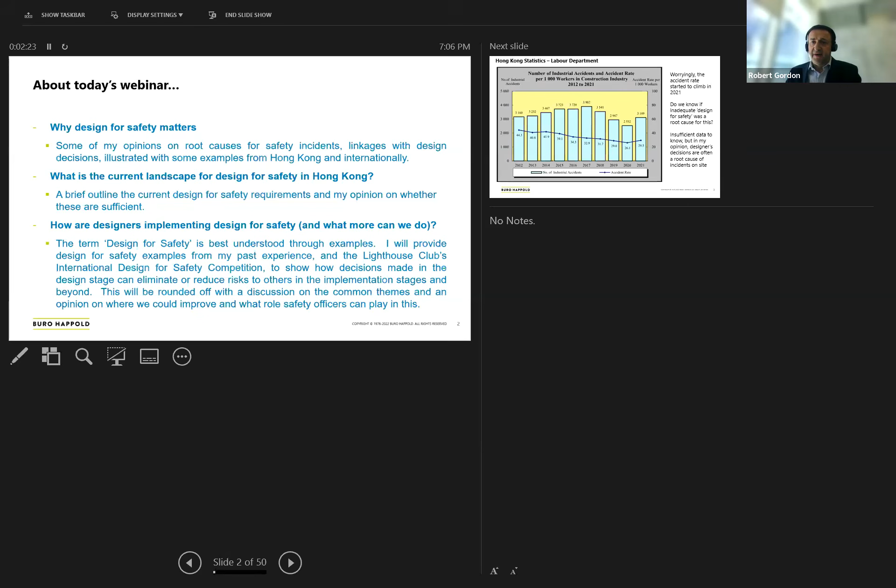I want to cover today why design for safety matters. I'll give you some of my opinions on root causes for safety incidents and the linkages with design decisions. I'm going to go through a little bit of the current landscape of the regulatory or legal requirements for design for safety and how that fits with the Hong Kong landscape. I'm also going to talk about how designers are implementing design for safety, and think about what more we can do.

A good place to start, and I'm sure a lot of you have access to these statistics, is the Labour Department in Hong Kong. What we can see is that the accident rate since 2021 has actually started to climb, having made some improvements over the preceding years. Hard to know if that's statistically relevant, but we do have to ask if design for safety is a root cause in any of these accident rates increasing, or for the current accident rates. There isn't really enough data there, but it's just a personal opinion that design for safety or designers' decisions is often a root cause of the incidents you see on site.

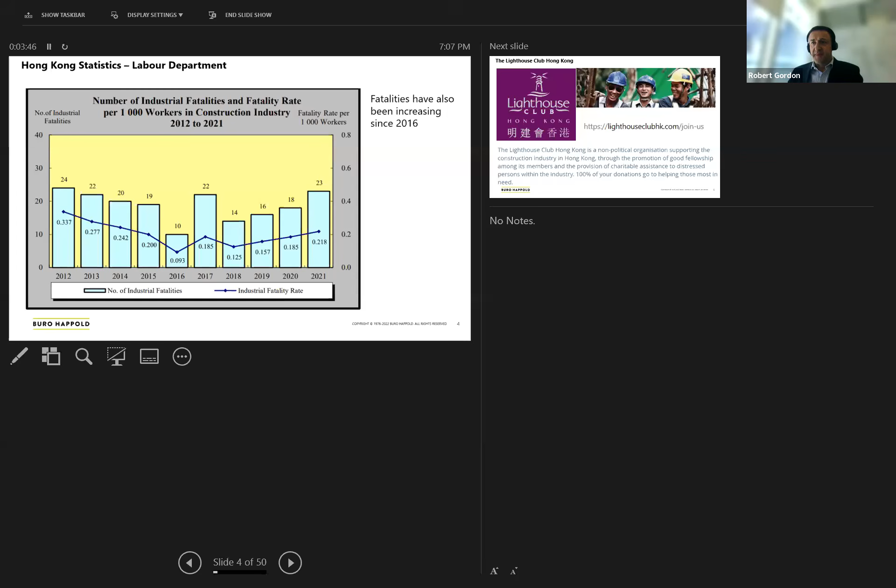Another statistic we can look at is fatalities. Again, in the construction industry, we can see that fatalities, since having made some improvements up to 2016, have started to go the other way. So are we making things worse, or is it such a low number overall that statistically it's going to vary anyway? Let's hope that we can reverse it, because that's what we want to do.

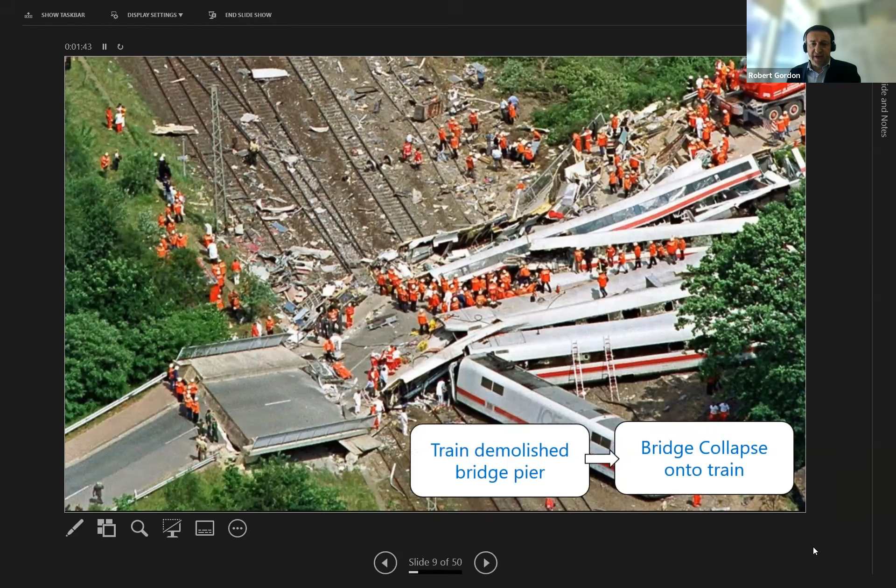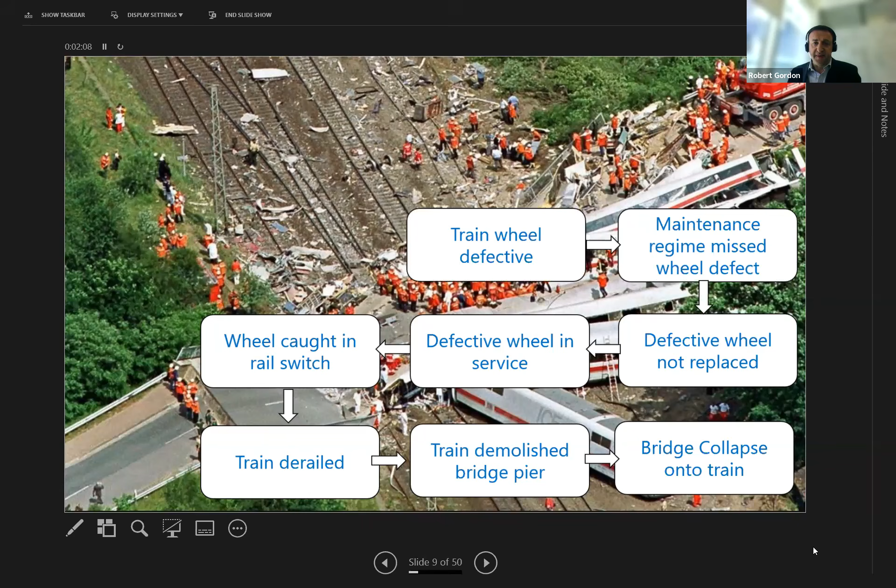So the bridge has collapsed onto a train, it's quite clear to see, but the train has demolished the bridge pier, and the train had derailed prior to that, and the wheel had been caught in a rail switch. It was caught in a rail switch because there was a defective wheel in service, and the defective wheel had not been replaced. The maintenance regime missed the wheel defect. The train wheel was defective already, and you can ask questions about whether the wheel design was adequate.

But I'd like to focus on the highlighted area, which is the fact that the train demolished the bridge pier and collapsed onto the train. The question really is, could we have saved more lives at the design stage if the bridge deck had not fully collapsed? There's an example a few years later from this event, where I was overseeing design of overpass bridges on the Taiwan high-speed railway, and we actually designed and built into the design criteria that if a bridge pier is demolished by a derailed train, the deck will still remain standing. It might crack, it deflects, has to be rebuilt afterwards, but it won't fall down onto the train at the time of the incident. So this is one of the key factors going back to design for safety - had the designers of this bridge thought about it, then perhaps fewer people would have been killed and injured.

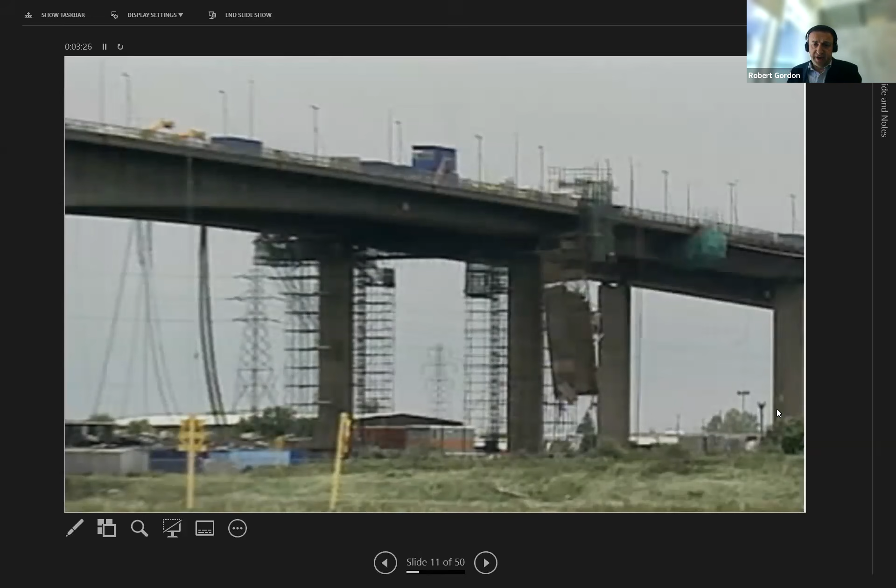There's another incident that happened back in 1999 on Avonmouth Viaduct, and I was actually on this project as a junior assistant resident engineer - 4 people died in this incident. What you can see here is a gantry that's hanging down and looks a bit broken, and actually it's supported. This whole gantry is supported on gantry rails that run on the underside of the cantilever of the bridge deck. And it shouldn't be there, it should be on the other side.

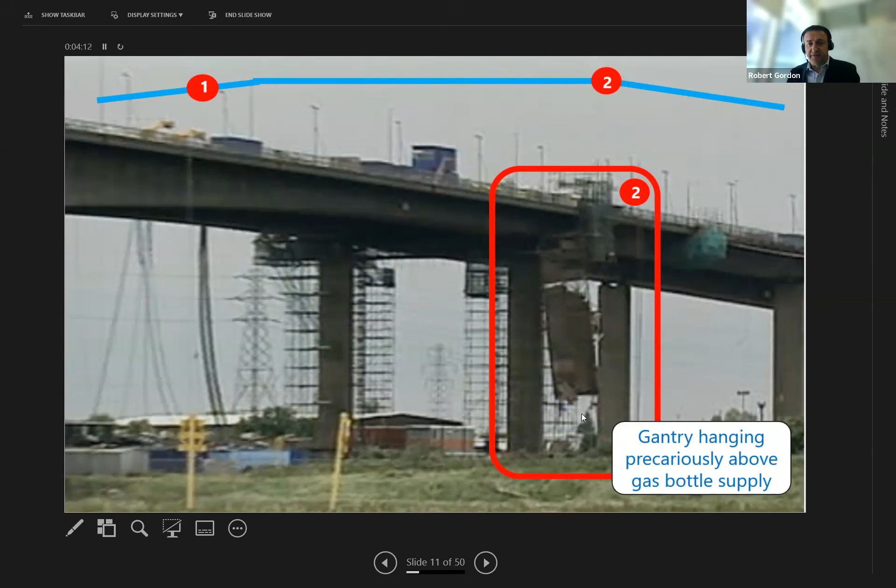I've just put in blue a key plan. So area 2 is the north approach, and area 1 is the south approach, and the flat area is the main span. This gantry should have been near area 1, not area 2, which is more than 1 kilometre away. What's happened is this gantry is hanging above a gas bottle supply, which could cause other issues if it fell down.

There's a vertical Alimak scaffold carrying the lift from ground level to the deck level for the bridge strengthening works, which has been shunted over by a metre from the impact. That gantry had acted like a sail - basically it had fallen down into this vertical position, acted like a sail, picking up the wind and going along the rail before it hit the gantry here, before it hit the Alimak here. What's happened earlier at area number 1, further along the deck, is that the lower end of this gantry fell off the end of the rail, tipping 4 people out, 20 meters to the ground.

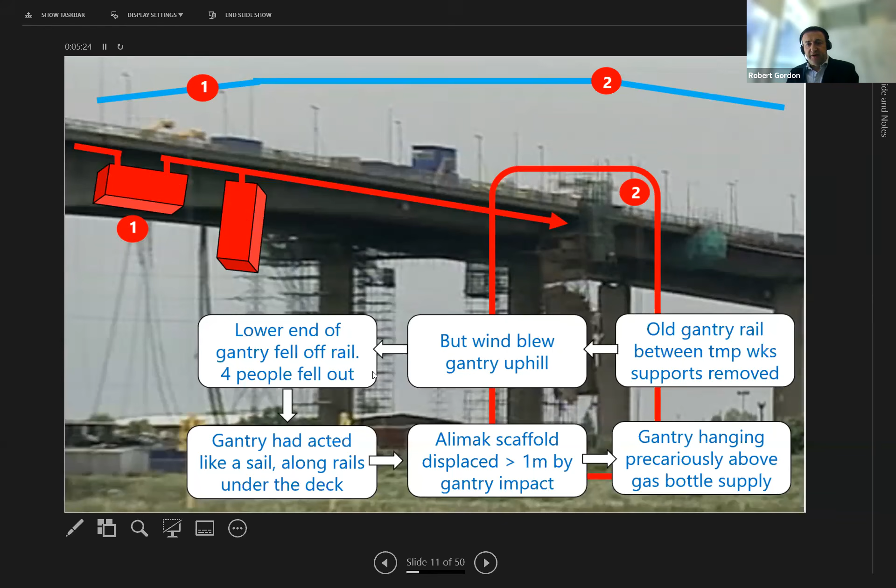You would think that with the slope of the approach span, securing it from falling downhill would be the issue, but actually it blew uphill. What was happening was there was rail works going on to replace the gantry rail. So what would happen is people would come in and they would take out a section of rail above and then put in a new section of rail to replace. So that old gantry rail between the temporary work supports was removed.

And although it was secured from going downhill, it wasn't secured from going uphill. Now, when that gantry was moving into position, it was moving into position with a new gantry crew for the day. So it's possible that they missed one of the steps in securing the gantry from going uphill.

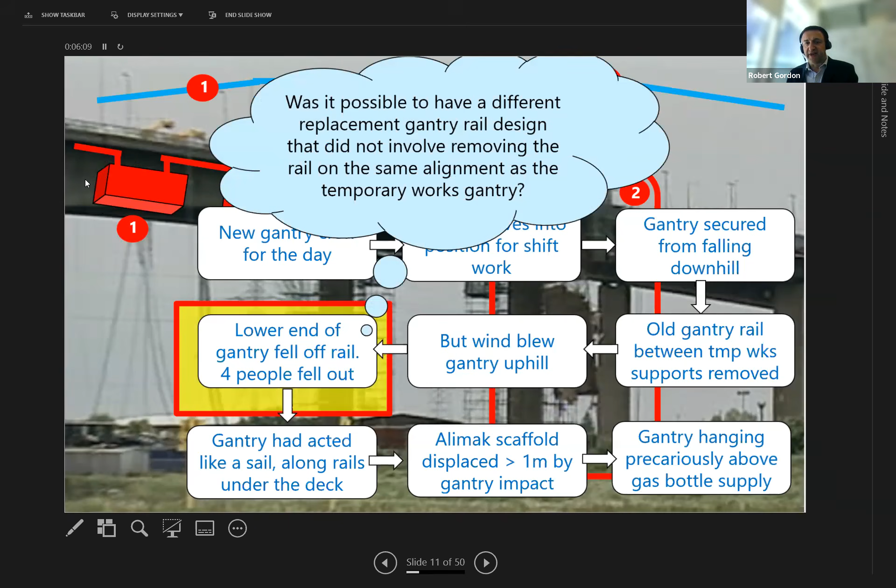But whilst this has gone through the courts and it's a well-documented case, one of the thoughts going through my mind is the fact that 4 people fell out. Was it possible to have a different replacement gantry rail design? Could the temporary works design have been on a different alignment to the permanent works, or vice versa? And therefore the risk would have been eliminated at the design stage.

This is a store in Riga. 50 people died here, and this is the aftermath. You can see that the roof has collapsed. It was in the news at the time, and the newspaper article was, 'The weight of the soil for the garden, made heavier by recent rain, will be closely examined.'

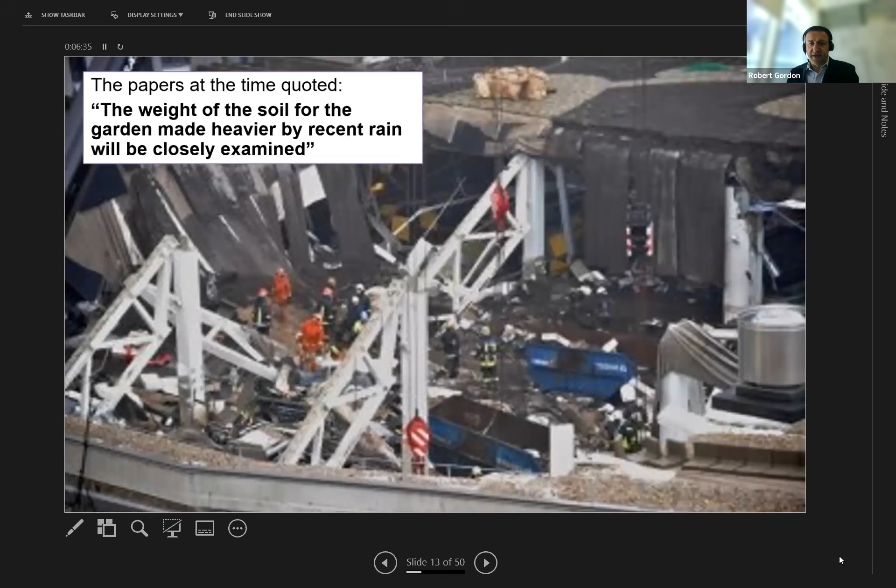So the question is, did the designers consider the saturated weight of soil for the green roof after it's been raining? How about the deflection of the roof under additional superimposed dead load than perhaps it was designed for? And what was the effect on deflection of the roof structure on the drainage paths under load, and the potential for retained water depth adding to the load incrementally?

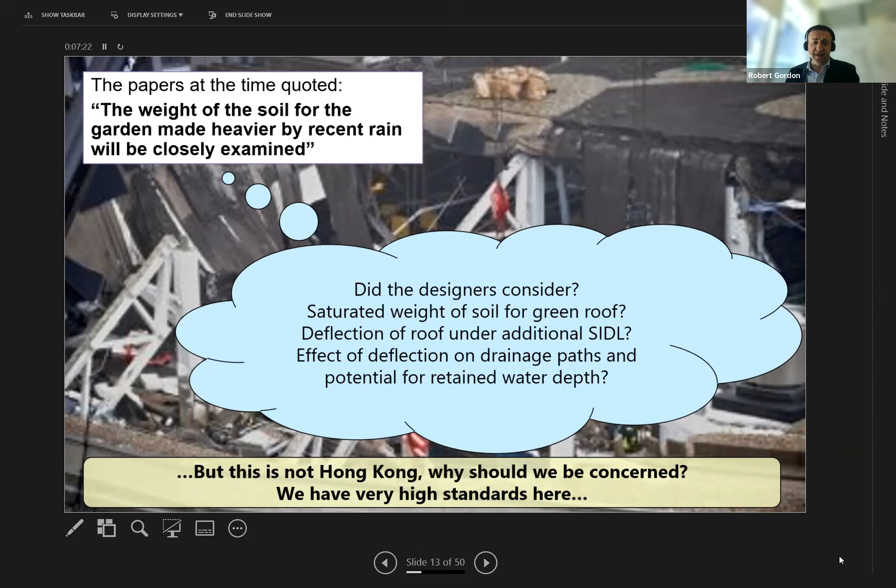I haven't seen the report for this collapse, but undoubtedly there was a linkage here. And the question comes up, well, this is Riga, it's not Hong Kong. Should we be concerned? We have very high standards in Hong Kong. And it's true that we do have high standards in Hong Kong, but then we had this.

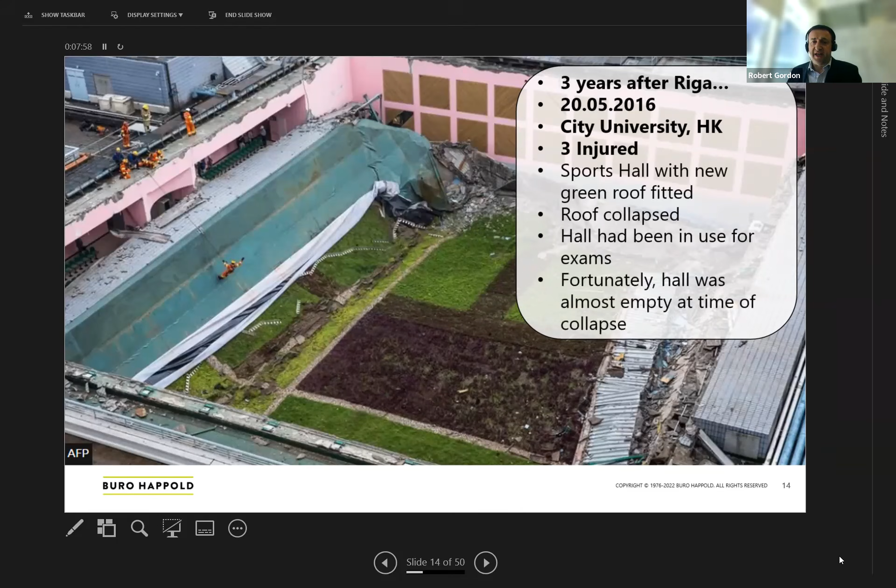And you may recognize this. It's basically 3 years after Riga, time enough for people around the world to learn lessons. 2016, City University, Hong Kong. 3 people were injured, and it was a sports hall fitted with a new green roof, which had collapsed on a hall that had been used for exams. So you can imagine that had that hall been full of people at the time of the collapse, the casualties would have been much higher.

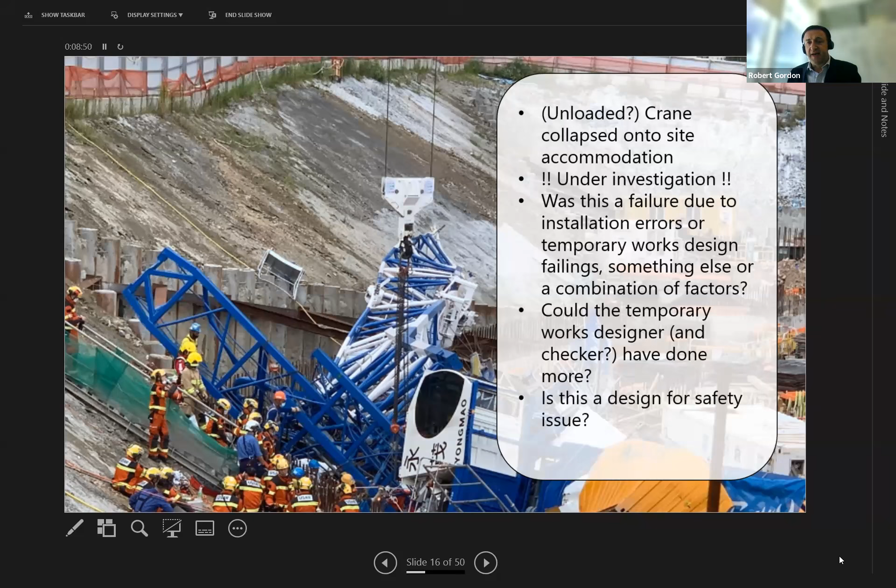There might be a report out by now, but I believe it's under investigation. But I think we have to ask ourselves, was this a failure due to installation error or temporary works design failings, or a combination of factors? And could the temporary works designer and the checker have done more? Was there enough redundancy built into the design? Was it easy to build? Was it easy to build without too many defects in the construction? And so the question is, is it a design for safety issue as a root cause?

Those are some examples of why design for safety matters. And I thought I'd also touch on the current landscape for design for safety in Hong Kong.

For those from the UK on the call, people will be very familiar with the CDM regulations, which was enabled by the Health and Safety at Work Act 1974, first issued in '96 and has been revised since. It sets out what people involved in construction work need to do to protect themselves from harm and anyone the work affects. Whatever your role in construction, CDM aims to improve health and safety in the industry by helping you plan the work, have the right people, cooperate and coordinate, and have the right information and manage the risks. Communicate it all so that everyone who needs to know knows, and consult and engage with workers about the risks and how they're being managed.

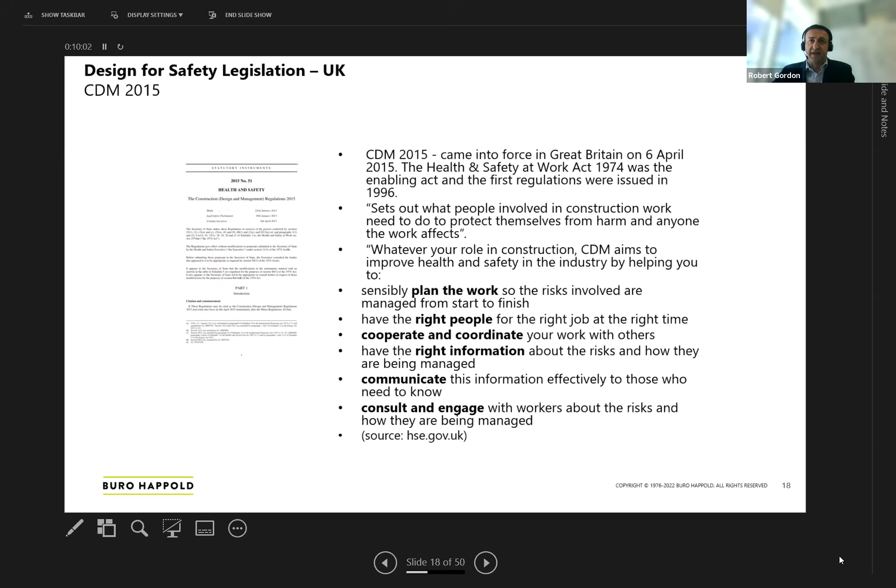So it really is a full life cycle appreciation of the health and safety risks, starting from design.

We can also look at similar legislation that's been enacted in Singapore for design for safety regulations in 2016. If we look through here, we can actually see very similar requirements: the duties on developers and designers, a review process needed through every phase of the construction project, a register for all projects, and the appointment of a design for safety professional, mandatory on all projects of significant value.

So there are some good examples of where legislation is used to help enforce design for safety. To the best of my knowledge currently, in Hong Kong, we have guidance notes developed through the works bureaus, but this is only guidance, it's not actually legislation. It does follow similar principles: identify and minimize hazards which may give rise to risks, reduce risks due to design and inform the parties, cooperation with project supervisor and other designers, provide the information.

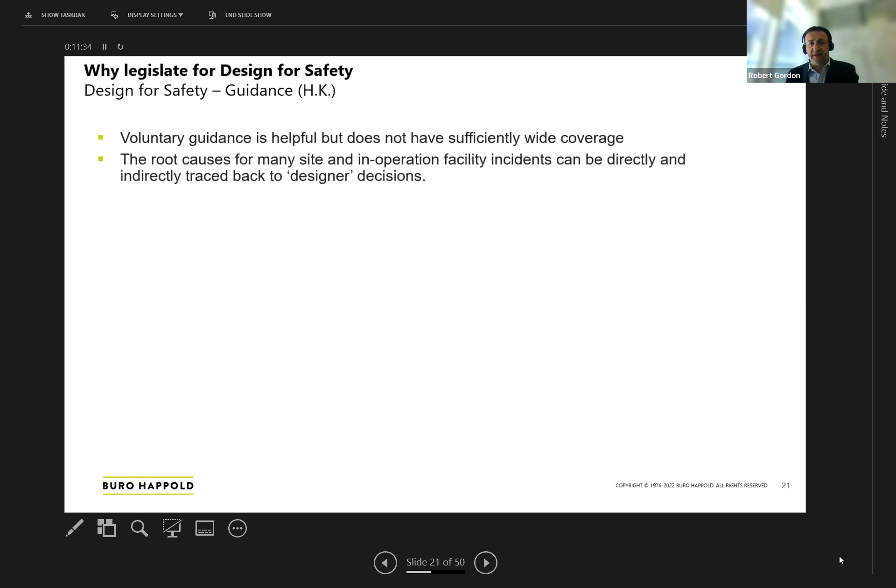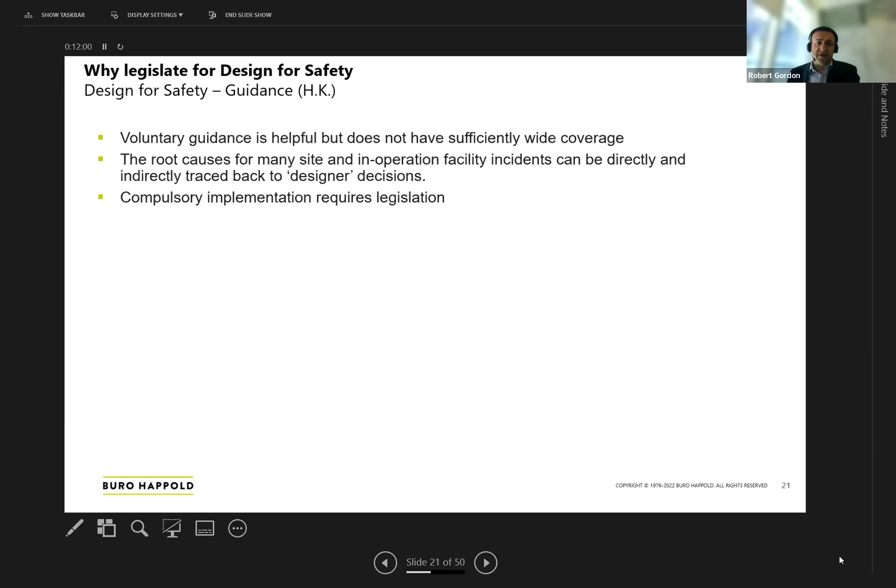What I think is probably missing is that this really is just voluntary guidance, and it does not have sufficiently wide coverage. If you look at the root cause for many site and in-operation facility incidents, they can be directly and indirectly traced back to designer decisions. So if we want compulsory implementation of CDM or something equivalent, it does require legislation to get everybody on board. Otherwise, it's purely voluntary with organizations, public or private, that wish to do so. And only in Hong Kong, only the government has the power to implement that legislation.

But construction industry bodies can lobby the government. And I would say that people like ourselves, everyone on this call, particularly those in Hong Kong, can approach our respective institutions and bodies who represent us and ask them to lobby the government.

But we also have to recognize the flip side of this. There are certainly interested parties that may take on extra liability, and they don't want it. And of course, nobody ever does want the liability. But it is the responsible thing to do.

I think that people who particularly own assets and drive the requirements for assets should have an involvement. And really, the effort for this is because we want to save lives. We want to save people from horrible accidents that cause horrendous disabilities, time off work, and distress to our families.

It also seems that we only get action taken when a major accident occurs. It's headline grabbing, it's on the front page of the news. Somebody gets put in a good political light for taking action, and also scapegoats are sought. Someone always has to take the fall, someone is to blame. But it's a very reactive approach.

And if we have legislation and the training and all the support that goes with it, it becomes proactive. And I would challenge ourselves to say, can we change the paradigm on when we take action?

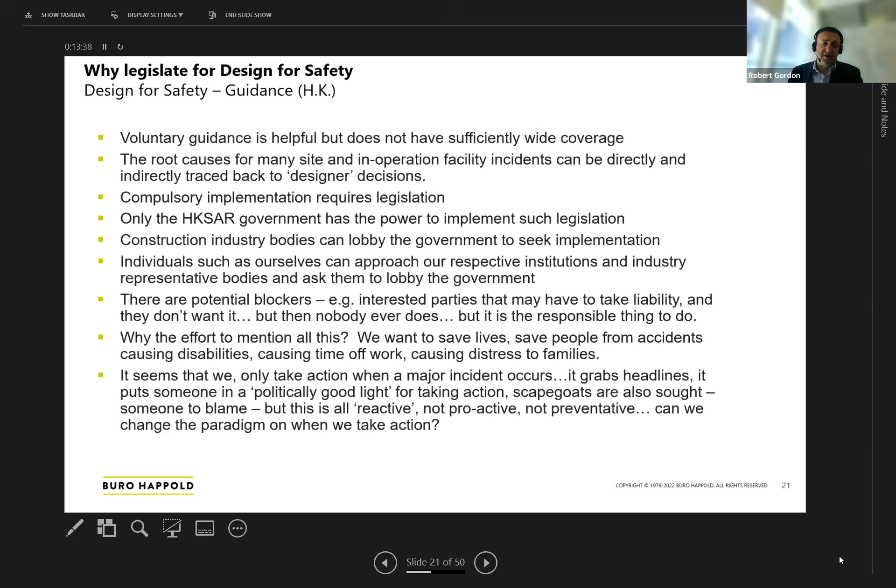So design for safety is about aiming to prevent before we implement. There's no ordinance in Hong Kong to cover it. And I think that if we had a Hong Kong version of, for example, the UK or Singapore version of their regulations, it would help to improve our health and safety in Hong Kong, with more motivation via accountability.

So there are bound to be people on this call that agree or disagree with that, but I think it's worth putting it out there.

Now, on a more positive note, we can look at how designers are implementing design for safety and what more can we do. But we probably need to think about who are designers.

It's easy to think of consulting engineers, but really I think it's anyone or any organization that prepares or modifies designs, BIM models and drawings, specifications, bills of quantity, design calculations, because this affects anything that can be built on a site.

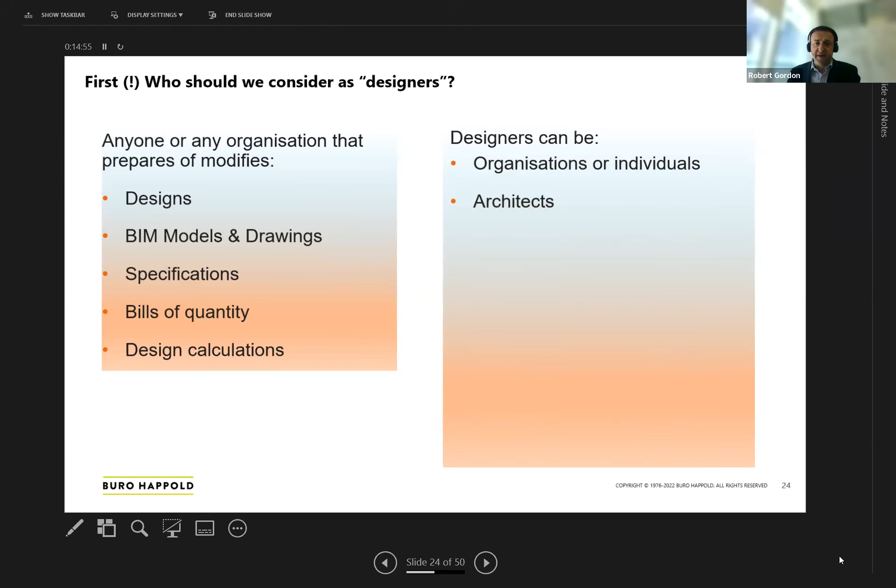And as a result, designers can be organizations or individual people: architects, interior designers, consulting engineers like myself, QSs, anyone who specifies and alters designs, contractors, subcontractors, tradespeople if they carry out any form of design work, and you may think of a few others as well.

Now I'm going to share some examples. These are a mixture of my personal experience, also of entries from the Lighthouse Club International Design for Safety competition. I'd like to emphasize the purpose for sharing it: it's really that I'd like to share some good examples. We might look at them and feel that there are improvements that could be made. I think we always appreciate there's always room for improvement. So I wouldn't say they're all perfect examples, but I think that at least they do get across the spirit of incorporating design for safety.

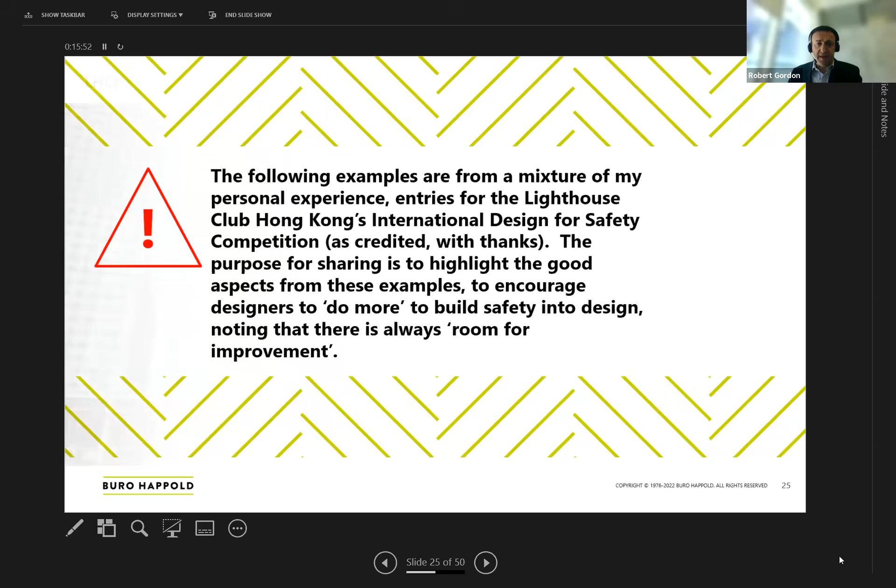So this was an entry from Aurecon, David Law, Swanston Square, The Malthouse in Melbourne, Australia. It's a historical building that was dilapidated, had been abandoned for 25 years, a former brewery building, and was going to be part of a new office development. What I liked about this one was that there was a full consideration of the properties of the materials of the building, given it was a historic property. They'd also given a lot of consideration to how the structure was working, how the load paths were working.

That's very important if you're trying to understand the influence of your new design on the existing structure. We do have examples of existing buildings in Hong Kong that have been modified and they've actually collapsed during construction.

In this particular example, they did a very good job of it. It was reviewed for construction, demolition, strengthening works, temporary stability and construction loads. And they'd also sought to minimize the steelwork connections, in particular above some tanks that were being left in place, which also reduces the future maintenance access need in difficult to reach areas.

In the design drawings, they'd also highlighted all the residual risks, and they'd built some flexibility into the design to cater for on-site conditions not matching those known at design, because with an existing structure you're often uncovering elements that people have not been able to inspect or properly understand before the contract works are awarded.

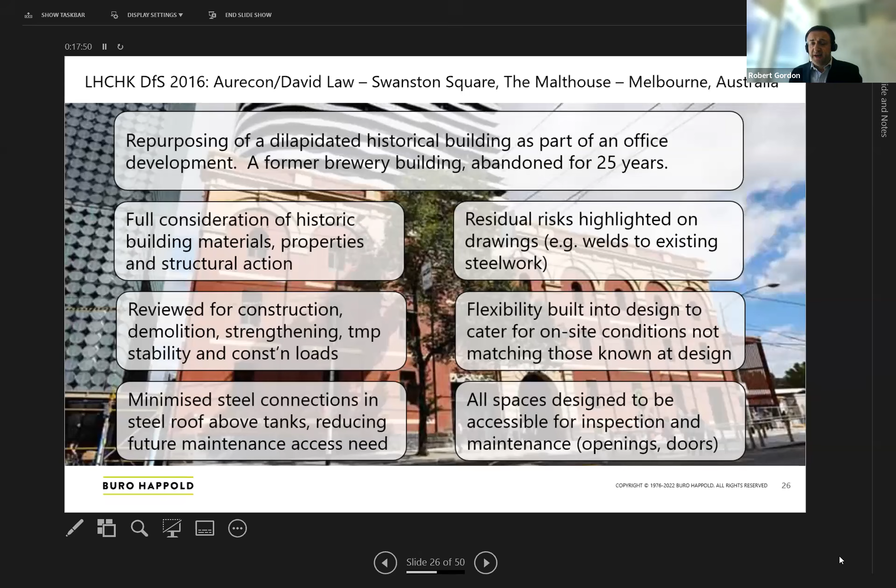Now, bringing it home towards Hong Kong, this was a good entry from Arup and Simon Pickard on the M+ Museum, West Kowloon Cultural District. They had to put a new museum building above existing railway lines, which were in tunnels, and also on reclaimed land. So quite a tricky site.

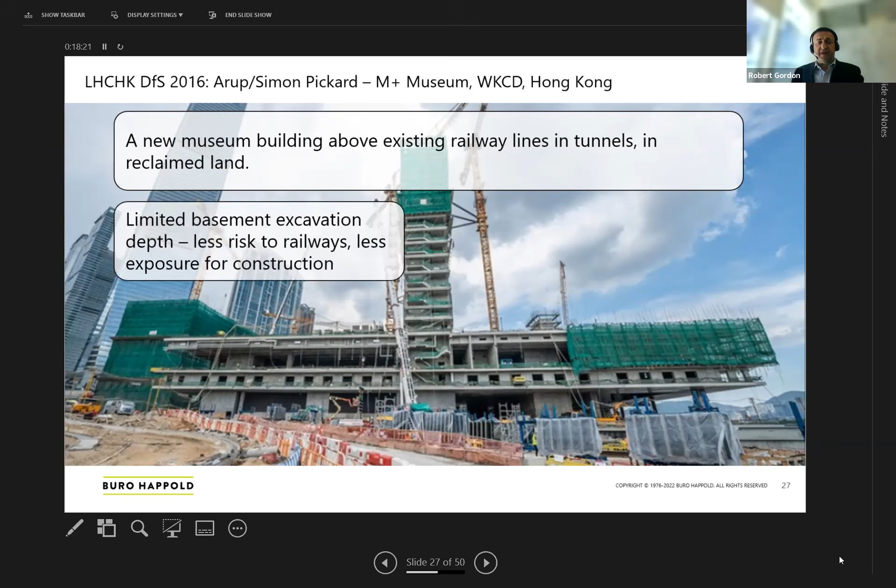And the facility is, as I'm sure all the Hong Kong people here on the call will know, is fully open now. But what they did was they limited the depth of the basement excavation. The more depth, the more risk. And that also meant by reducing it, there was less exposure for the construction later.

They also built in high-level access walkways for maintenance for the MEP plant and lighting. So basically, one of my favorite questions to anybody on design for safety is, how do you change the light bulb when it's 5 meters up in the air? And if the answer is you need to get some special kit out and you need PPE, you've failed the first exam question on safe access to change a light bulb.

In this case, from the high-level access walkways, you can safely access the light bulb and you don't need any special kit to change the light bulbs.

Now, they took it very seriously. They had design for safety gateway reviews at 30%, 70% and 100% of the design stages, across all the disciplines. And they also enabled an advanced works contract to look at the buried utility locations and diversions needed, which also helped to remove some of the in-ground risks.

And they also provided construction sequence diagrams. I always think that any designer must always come up with at least one plausible method of construction, and I think they should also show it on the design information to show contractors: yes, I've thought about how I'm going to build my asset, and I've come up with a feasible method. I understand the plant and the temporary loads and the construction loads to build it, and I've allowed for it.

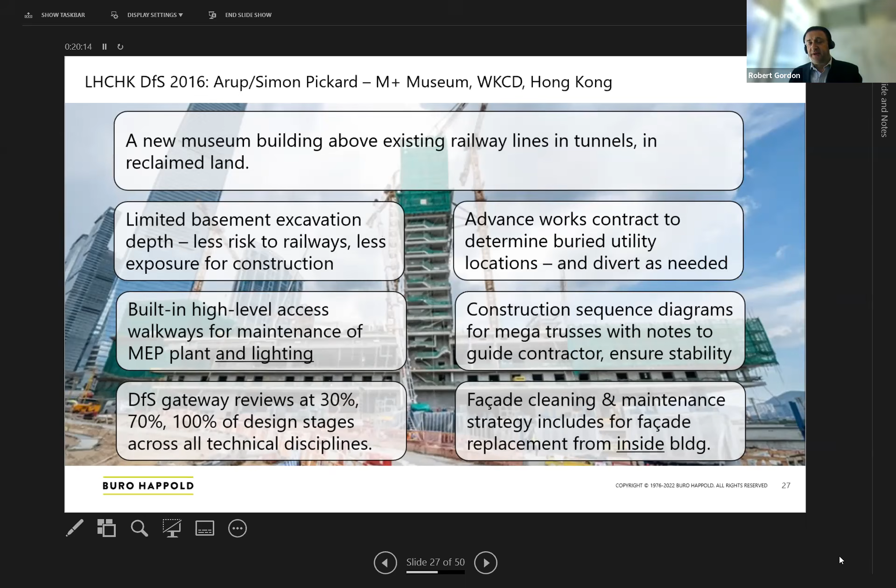Now, here's another example. This is the Liantang Heung Yuen Wai border crossing point road and tunnels. And there were some challenges with this one because there were 48 8-meter diameter cross passages for a 4.8 kilometer dual 2-lane tunnel. Tunneling through volcanic rock, high water table, variable ground conditions. And at the time, there was no topside access for further ground investigations or pre-excavation grouting. So this had high risk written all over it.

What they did was they looked at having horizontal pre-excavation grouting from the first tunnel bore to increase the extent of the grouting. Also eliminating and reducing MEP equipment in cross passages by design to reduce the diameter. So if you can reduce the tunnel diameter of the cross passages, you've also reduced the risk.

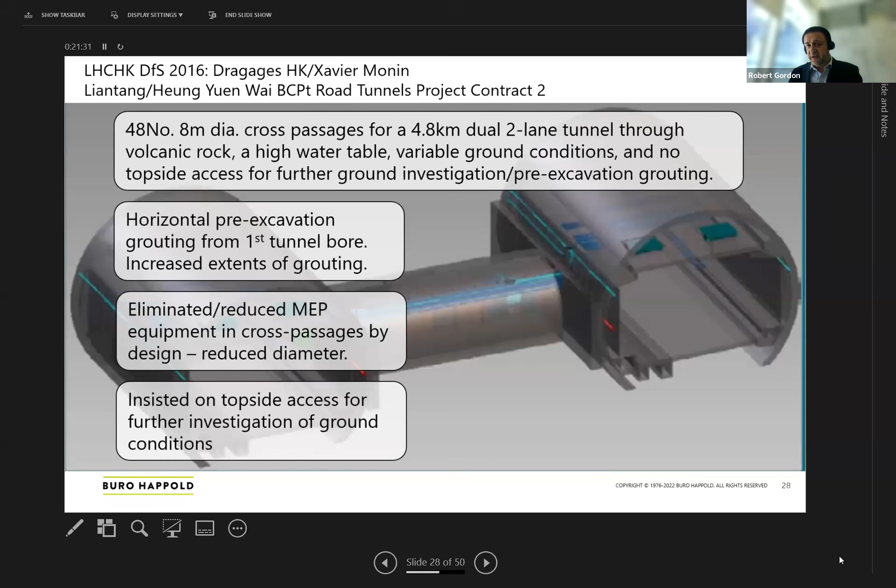And ultimately, they did insist on topside access to get that further ground investigation to understand the ground conditions. And I think if ever you're tasked with a project where they're not giving you access for the ground investigation to properly understand the risks, I think you do have to insist on it. And this is a good example of that insistence paying off.

They used experienced designers experienced in soft, poor ground conditions. This comes back to not just the fact they had tunneling engineers, but they had people experienced in these particularly challenging ground conditions. So it's very important as competent engineers to understand the limits of your competence and know when you need to bring in expertise to assist you.

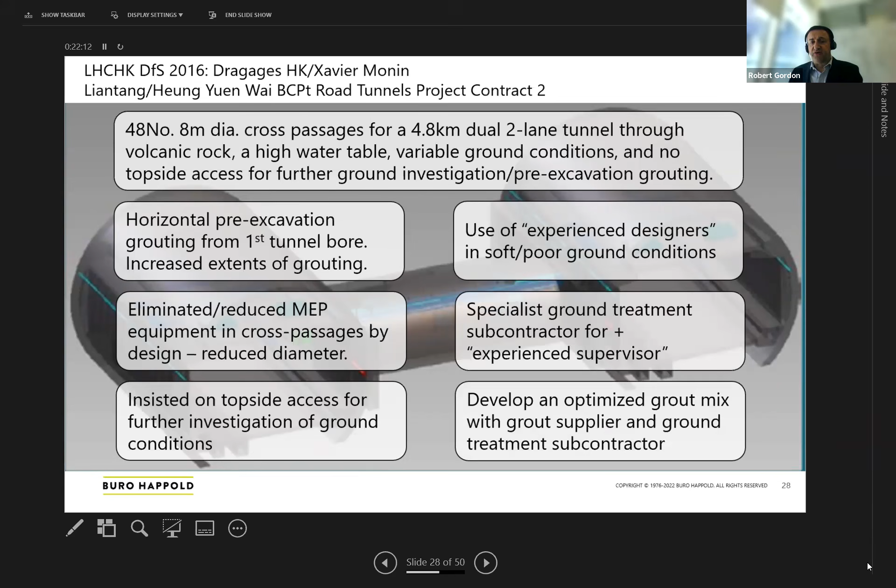They also built in a specialist ground treatment subcontractor as an experienced supervisor, and developed a special and optimized grout mix with a grout supplier and ground treatment subcontractor. So they weren't leaving anything to chance here.

Another example is out at the Tuen Mun Chek Lap Kok Link Viaduct project in Hong Kong. What you're looking at here is a precast concrete pile cap shell. It's a marine pile cap using match cast concrete shell modules. It was quite an interesting challenge here to build the pile caps above the water.

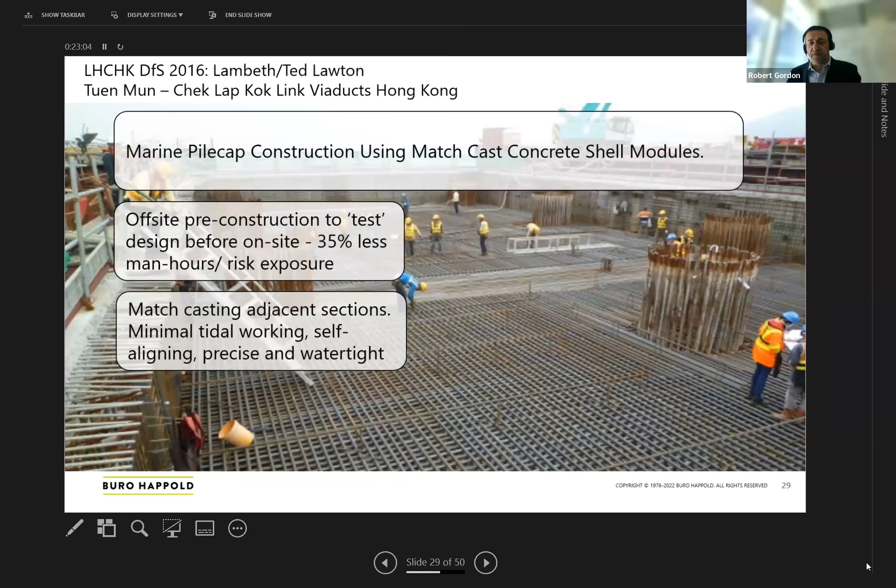So what they did was off-site pre-construction to test the design before being on site. They reduced the number of man hours, which also reduced the risk exposure. Match casting the adjacent sections also minimized the tidal working, and because of that, they had self-aligning sections, which were more precise and watertight from the word go.

The use of these precast and pre-stressed shells mitigated the need for welding. Each shell, which is supported on piles, forms a watertight, safe working area for the pile cap construction.

The bottom level of the caps were also lifted to be above the low tide for around 2 hours a day, which also gave certain construction access. The shells also provide additional corrosion protection.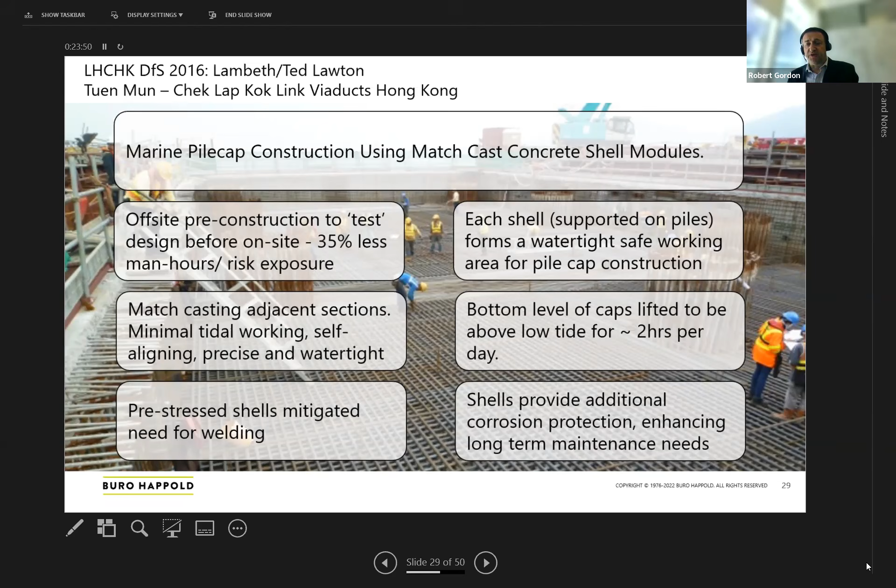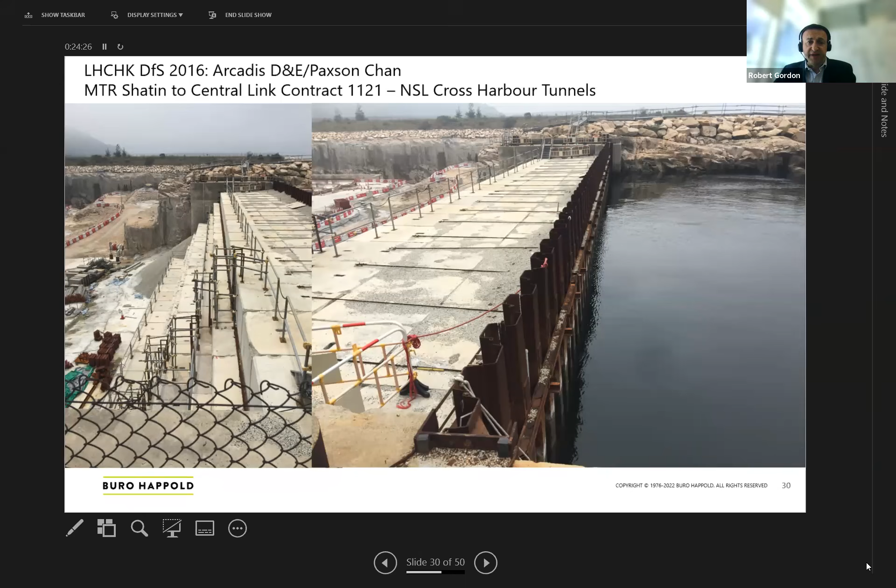Another example here is on the Shatin to Central Link 1121, a contract I was working on, and this is the casting basin at the old quarry at Sheko. This temporary dock gate was actually built out of precast concrete blocks that came from another MTR job, but basically it was needed to safeguard the dry dock area.

All these concrete blocks came with lifting eyes, so with those lifting eyes, it's very easy to lift them into position, drop them in position, very easy to construct, and also very easy to deconstruct later when it's time to let the water back in.

In this dry dock, the immersed tube tunnel units would be constructed, and when it was time to float them out, they'd deconstruct the dock gate, let the water in slowly, and they'd be able to then float the units out for the construction of the tunnel. Indeed, as you'll know, in Hong Kong, the tunnel's now open for service.

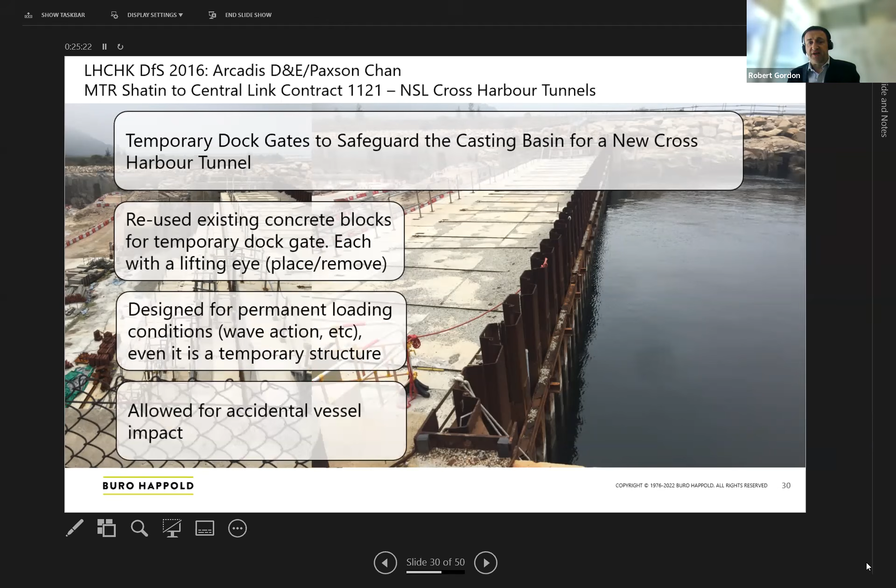This dock gate was also designed for permanent loading, even though it's a temporary structure. It was designed for the wave action, and it was also designed for accidental vehicular or sea vessel impact.

There were grout pipes behind the sheet pile wall acting as a secondary measure in case there was water ingress, so it gave you an opportunity to tighten things up. There was also gravel fill and drain pipes beneath the base of those dock gates to release the water pressure. So again, lots of belt and braces measures to keep people safe.

During construction, fast setting adhesive anchors were specified on the existing abutment walls to minimize diver works in the water. So quite a few measures implemented to safeguard the dry dock area. And there's a picture of the dry dock basin as it was under construction.

Moving to Singapore, an entry from EFT Craft, Siebrandus Wichers, the Singapore Sports Hub cladding installation. I've shown this picture because I think it gives you an appreciation of just how high that roof is. The exposure of trying to do work at height here is enormous. The original requirement was to install that roof and soffit cladding in situ.

But instead, EFT Craft looked at prefabbing those units at ground level using large ground level jigs. That reduced the number of labourers needing to work at height by more than 75%, which I think is fantastic in reducing the risk.

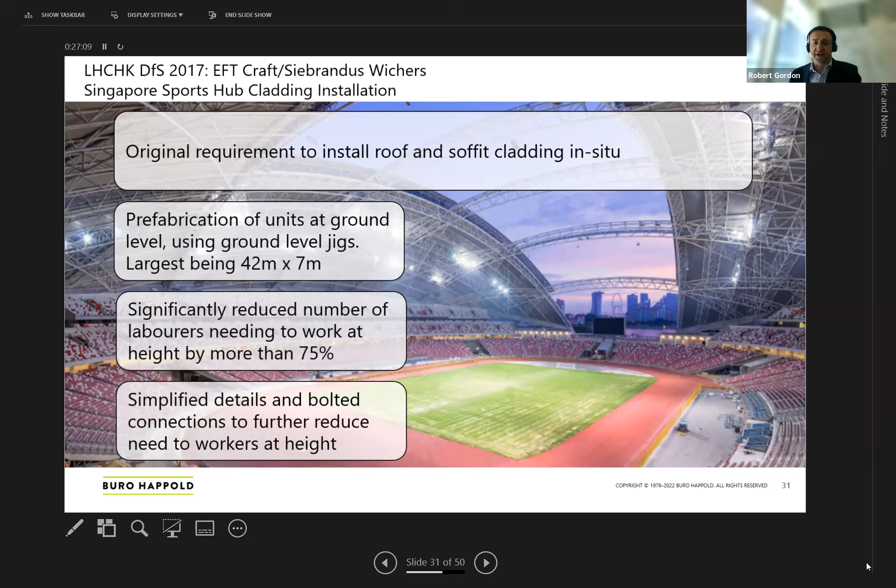They also simplified the details and the bolted connections to further reduce the need for workers at height. One thing about simplification is that the simpler a design is to actually build, the more likely it will get built the way you intended and without any incidents, because there's less opportunity for people to make mistakes or get confused or to not follow the instructions.

So there were no welded connections, all bolts and screws. That also helps with the quality of the work.

They also did 3D scans of the cleats from ground level, then did a computational analysis of those to understand what alterations were needed at ground level before anything was lifted into place at height. Also, by standardizing the cladding panels, it mitigated handling, coordination, and installation errors.

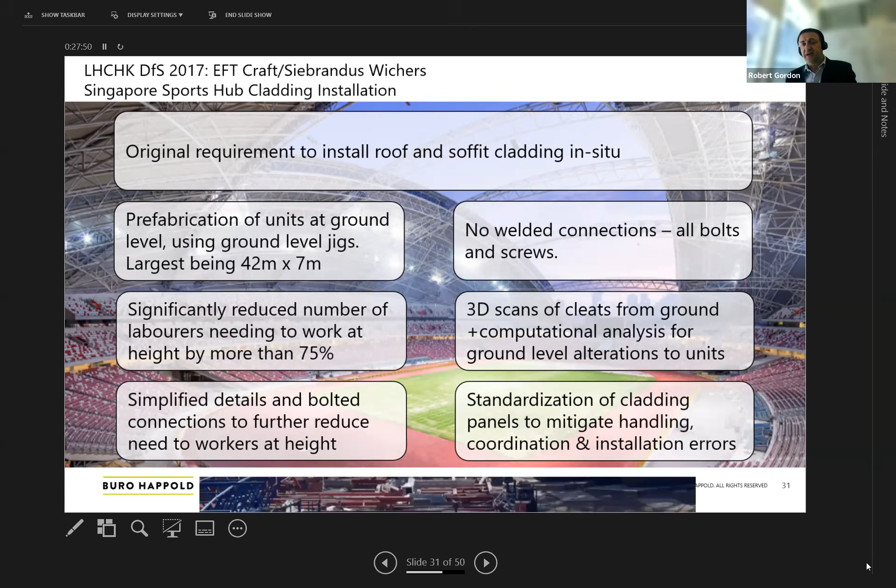So again, quite a few measures here to improve the safety of the built asset for construction by design. And here, again, maybe not a perfect example, but it shows how they're building the cassettes for installation at height.

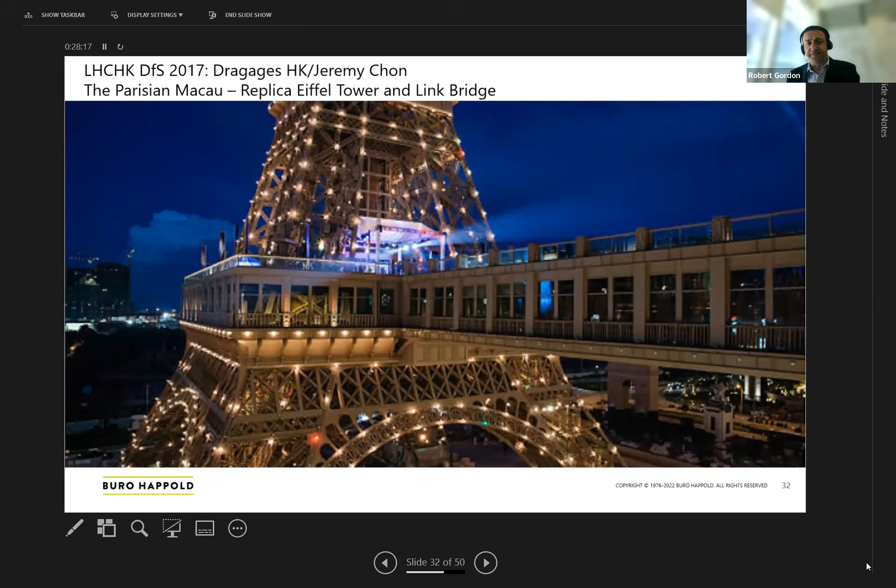Moving over to Macau, the Parisian Macau, this is a replica Eiffel Tower, so this is not the one in Paris. It was the construction of the tower and the link bridge - very complex, slender, high tower.

It was designed for the temporary scaffolding supports to be integrated into the permanent works design. Something designers can do a lot of is consider how they can adapt the permanent works to enable the temporary works and vice versa, so that you can minimize the stages in construction and the amount of works needed.

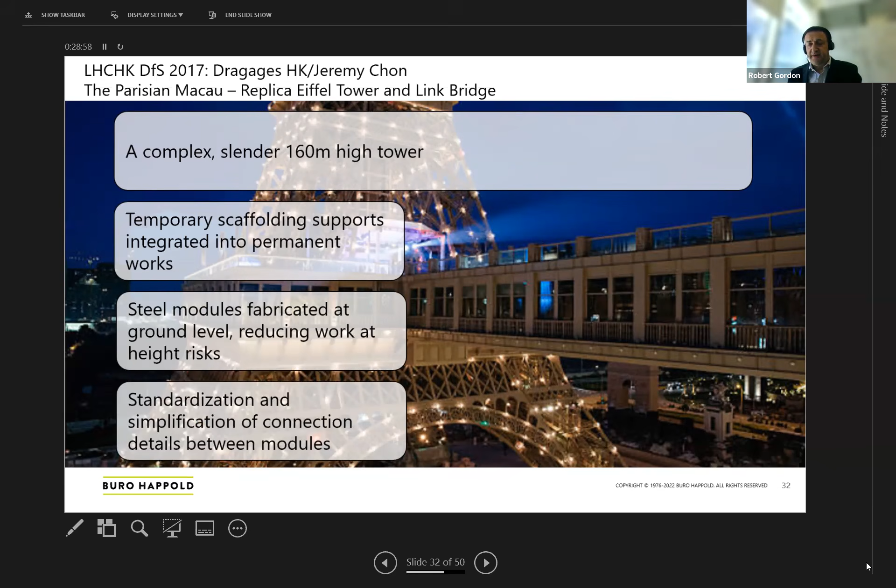In this case, steel modules were fabricated at ground level, also reducing working at height. And there was again a lot of standardization and simplification of the connection details between the modules, again limiting the errors that can be induced by workers and so on.

Now something I want to mention here is important. We're in the digital world these days, and certainly BIM has become more prevalent throughout our industry, and there's a lot of digital tools now there. Digital tools like BIM can be used to build the works before you build the works in the digital environment, effectively a digital twin of what you're about to build. You can check crane capacities, you can check the routing of all your elements, you can check for finger traps, you can really optimize the sequence for safety.

Within the permanent works design, this also included a maintenance walkway incorporated into the link bridge, which means that you have safe access for future maintenance without the need for PPE.

Also on the tower itself, there are a lot of decorative elements, and they were originally going to be cast iron. But why put cast iron decorative elements 30 meters above the height anyone can see them, when you could have glass fiber reinforced polymer elements that look the same, are much lighter in weight, and much easier to lift into position? So you can improve the safety also by being more careful about material selection.

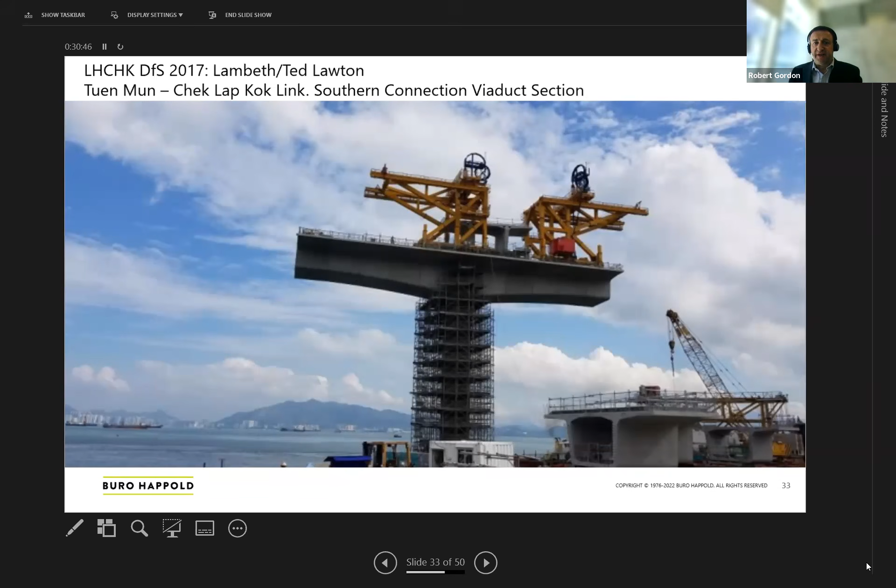Bridge construction has often been a good example of mechanized construction. This one's from Lambeth and Ted Lawton for the Tuen Mun-Chek Lap Kok Link Southern Connection viaduct section - a new mechanized method for bridge construction, and you can kind of see the K-frame design there for these temporary works. Basically looking at factory production methods using very lightweight machines, a kit of parts approach to the machines, standardized modules, good control systems, and a minimal learning curve for any worker having to operate them.

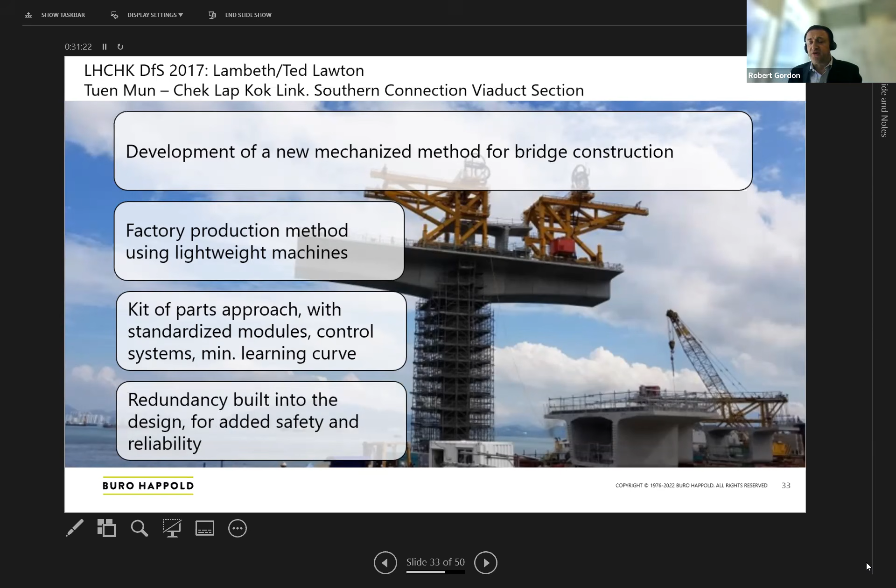Also, redundancy built into the design - I think that's also a key thing, that things do go wrong in construction. Sometimes there are quality issues, but if you build some redundancy in the design, then you're not too close to the bone. And if there is a mistake on site, chances are you can work with it. So it does add additional safety and reliability.

This machine was also single operator run with a handheld remote control unit, hydraulically controlled movement on skidding pads, so it's not wheels - so you don't get runaway situations, particularly when you've got gradients on the highway to deal with.

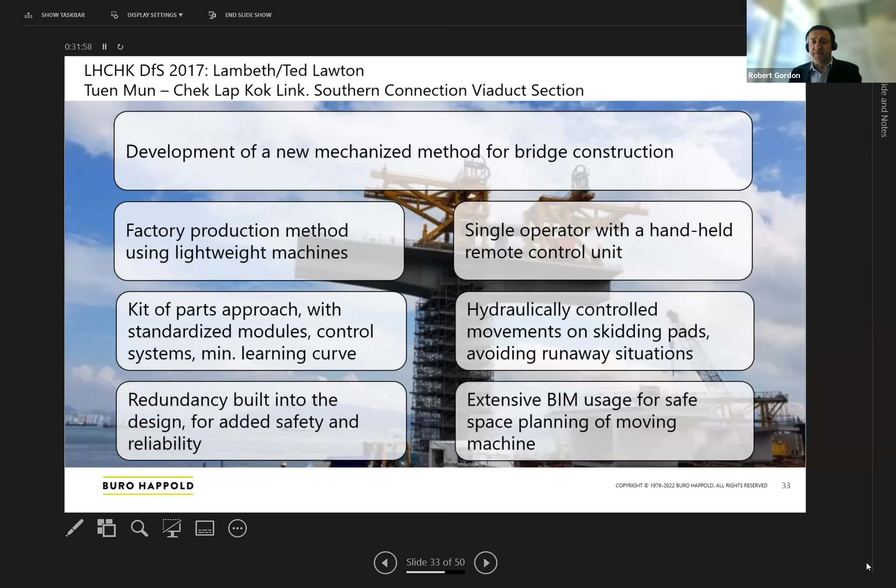And again, similar to the previous example, they used BIM. In this case, they're looking for things like finger traps and safe working zones and so on to make sure that they can safely move the machine. And these are the family of K-frames that they came up with for the project.

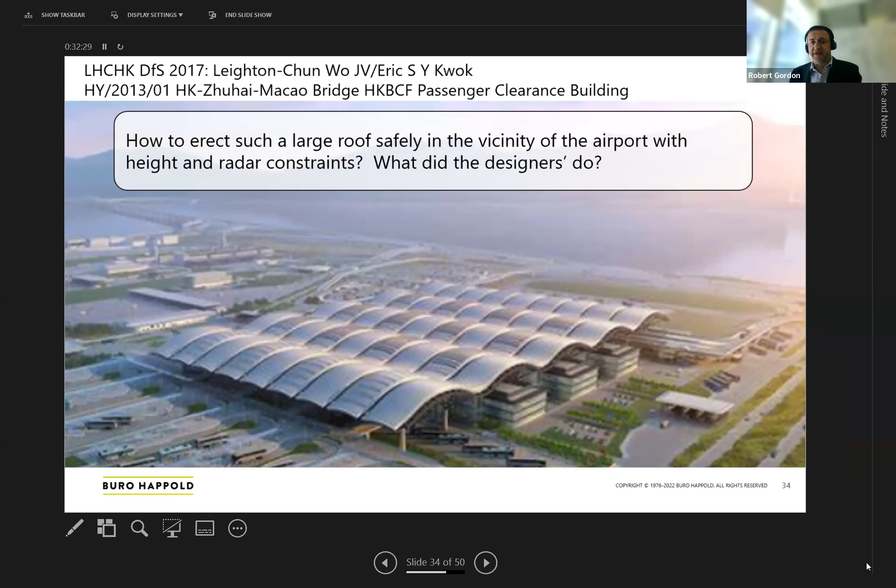Moving on to the Hong Kong-Zhuhai-Macao Bridge passenger clearance building - that's quite a complicated roof to get built. How do you erect it safely, close to the airport with height and radar constraints? When you look at it, it's got this air height restriction of 38 meters, and the final roof height's 36.5 meters. So you're not going to be able to use cranes to erect the roof - you'll just breach the safety limits.

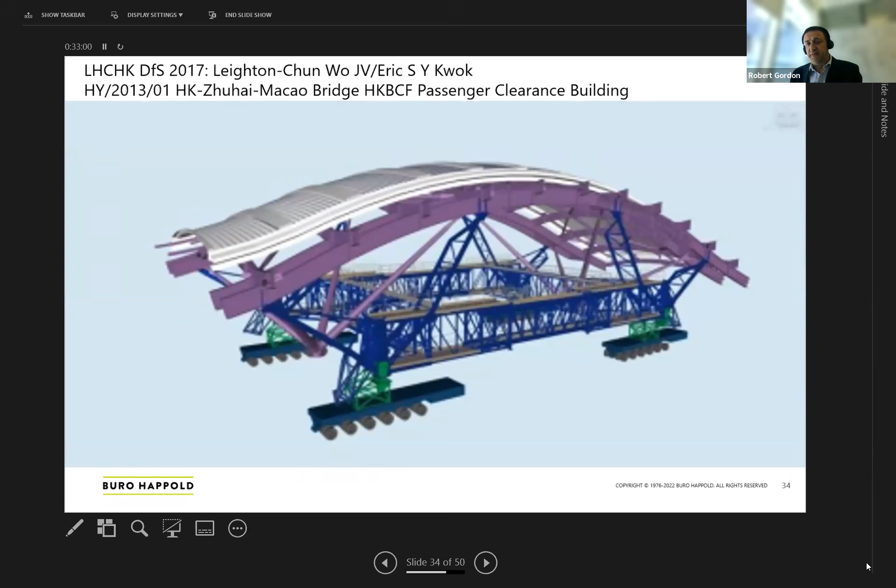So the answer was to prefabricate roof modules and integrate as much as possible into the roof module off-site, barge it in, bring it aside, put it onto SPMTs and move it into position.

The SPMTs were worked out how to move them into position, the routing, orientation, how long it takes, and also thinking about how these elements could be jacked into position, the sliding rails to move them along. You can see that it moves like a cassette.

One section after the other, and also an allowance for typhoon tie-down areas, so that if bad weather comes in, the units can be tied down safely in pre-arranged locations without any risk of collapse.

Once you've done these main units, you can then come back and do the infill units and jack those into position as well, and end up with a finished product.

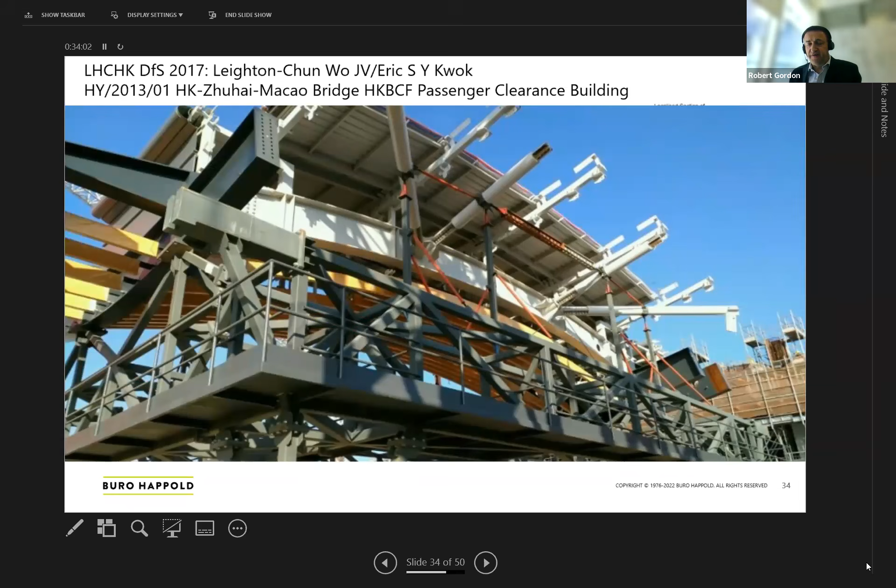What's interesting to note here is you can also see the temporary working platforms built in, again minimizing the risk of working at height. So in summary, this was designed for construction, modularized units including the cladding and prefab offsite, a conceived erection method which minimized working at height.

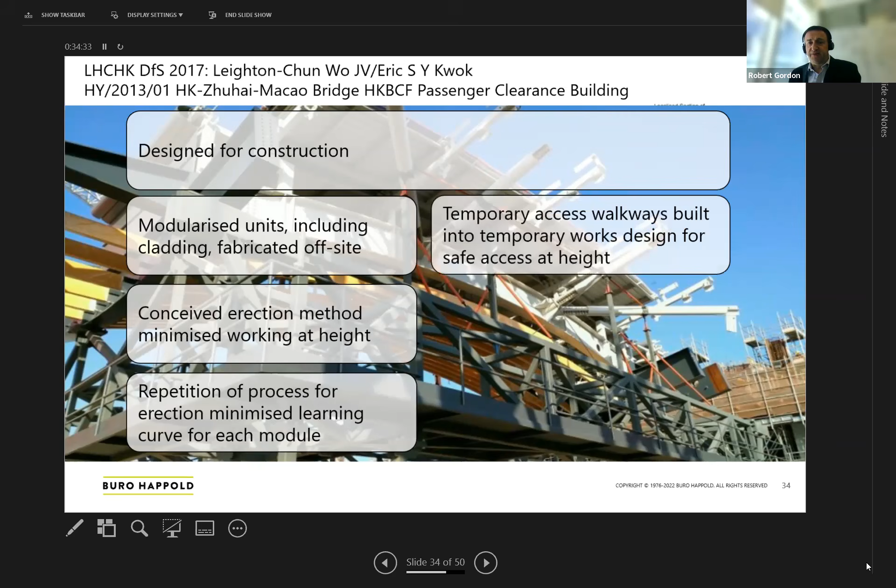This was all conceived at the design stage and then fully brought on board by the consultant that helped the contractor, and the contractor ultimately to build this. There was a lot of repetition in the process for erection, which also minimizes the learning curve for each module, the temporary access walkways, tie down areas, and also eliminated the risk to flight operations.

That means minimal setup in the subsequent bays. It reduces exposure to working at height and all the lifting. And it's also very easy to train and direct the labour workforce.

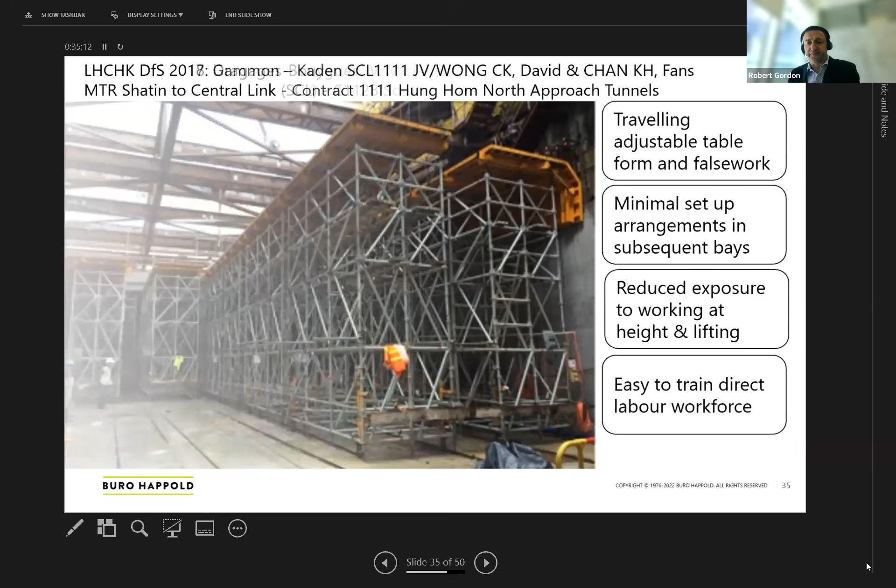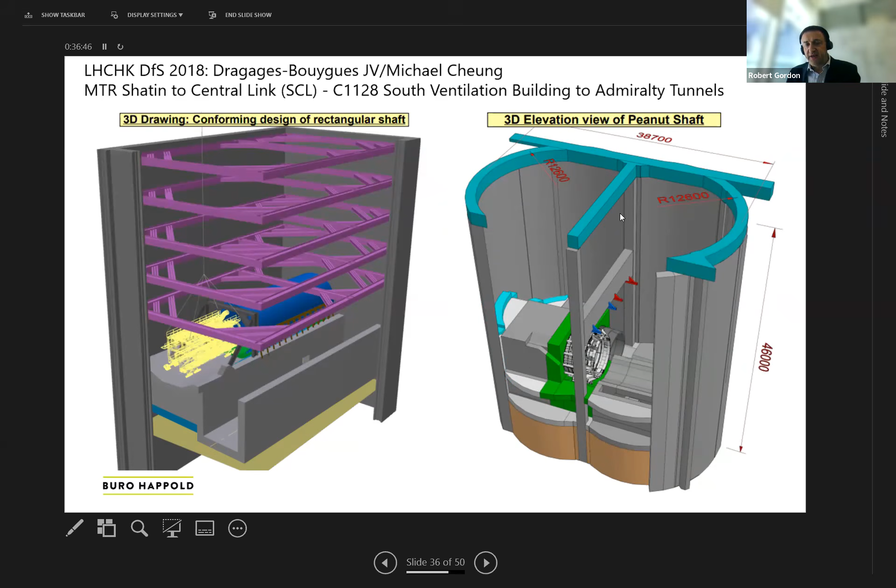You can see that it maximizes the area needed to be able to lift elements in. It resolves a lot of those design for safety issues. It frees up the space. It also reduces the ground settlements because of the way the peanut shaft operates, and it removes that lower level strut stability issue.

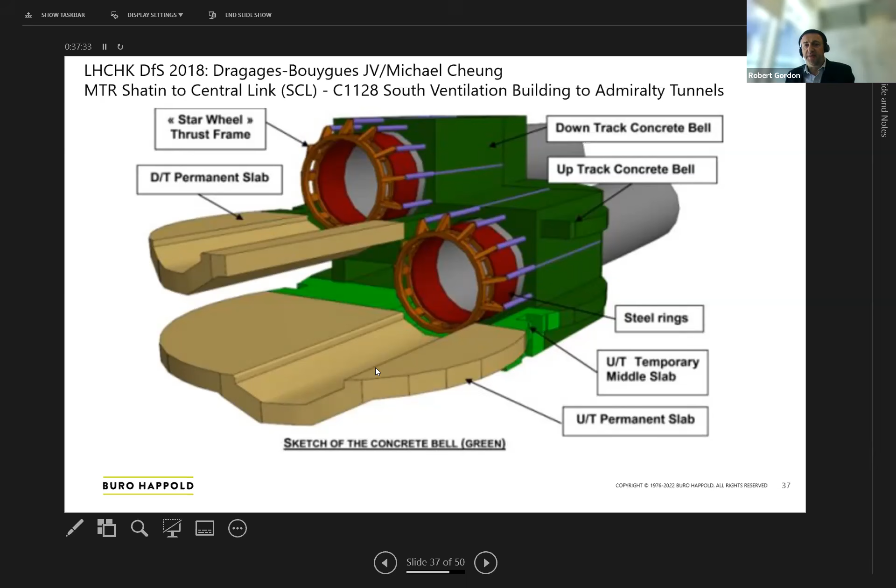And it also, for that complex strut installation and removal process in the traditional shaft, it also eliminates that risk. Now, they went one step further, and basically they installed these concrete bells and thrust frames in order to launch the TBM. So this was a new way of thinking about how to launch a TBM without having a very long, effectively, train for the TBM to launch. And it left a lot of space for the TBM, or the space behind the TBM, for other elements of construction. So that thrust is transmitted within the star wheel, the concrete block and stressing bars.

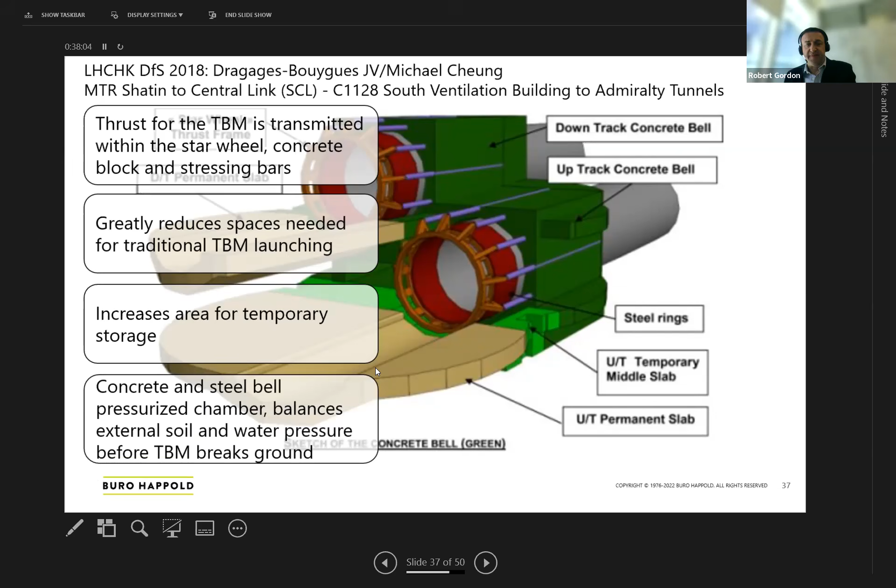It reduces the space needed for traditional TBM launching. It increases your temporary site storage areas, and also that concrete and steel bell pressurized chamber balances external soil and water pressure before you actually break the ground with the TBM.

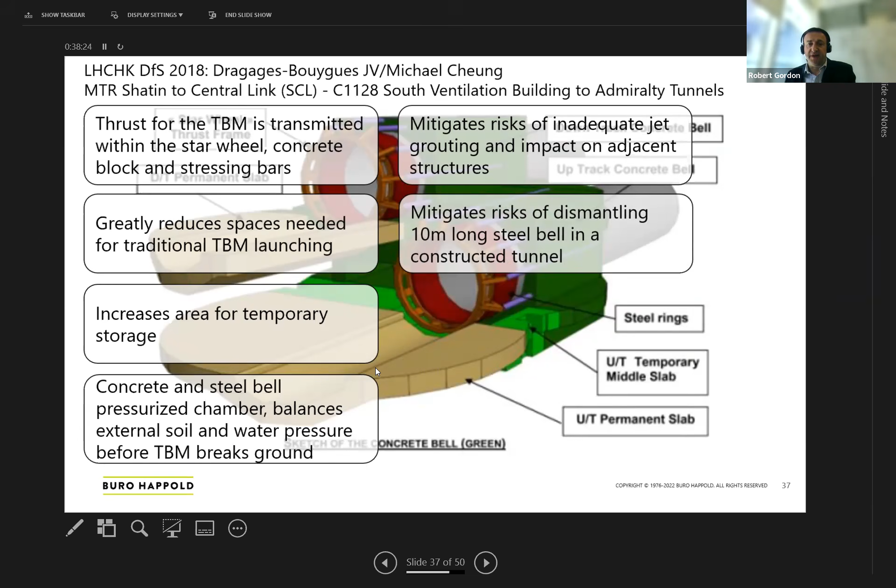Also mitigating risk of inadequate jet grouting and impact on adjacent structures. It mitigates that risk of dismantling what would normally be a 10-meter long steel bell in a constructed tunnel. And the concrete bell is incorporated into the permanent works, so further enhancing.

And there were some other permanent works also, such as the escape staircase that was redefined and redesigned to delink it from the TBM activities, which also enhanced safety and provided an EVA and access during construction.

But design for safety doesn't have to be so fancy.

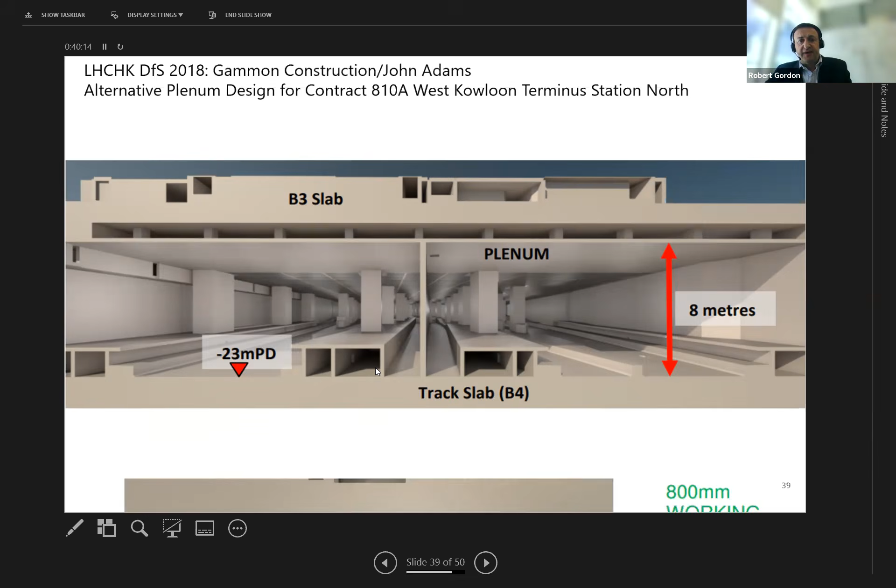We come to Hong Kong West Kowloon Terminus Station, where Gammon were tasked with building this plenum. This plenum is the space above the platforms and tracks but below the structural slab, 8 meters above. So how to build this safely? Well, all of this was to be implemented in situ with an 800mm working space, which is really a bit of a non-starter from a safety point of view.

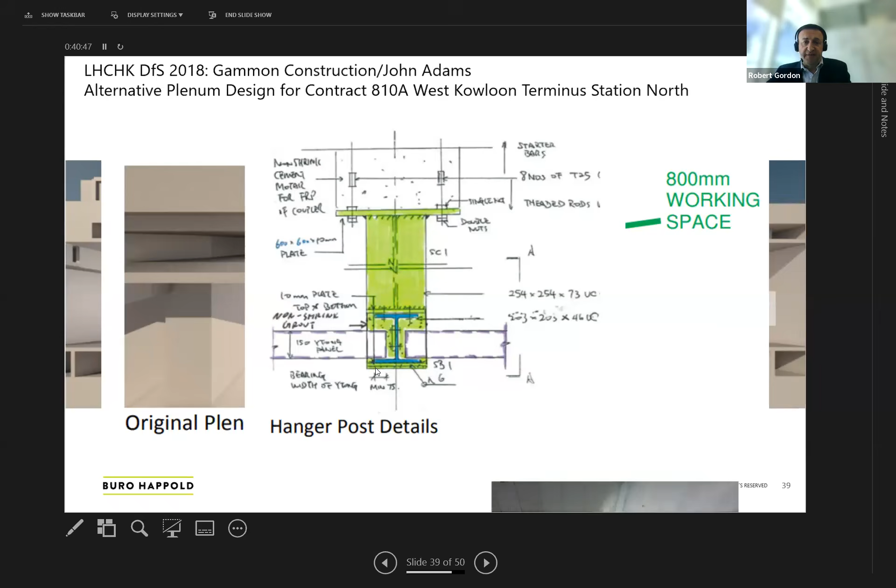The answer was to come up with a different design detail, utilizing steel columns, steel beams, and precast concrete elements to effectively provide prefabrication, a kit of parts approach to building the plenum. The finished article still achieves everything the original design set out to achieve, and also provides future flexibility if they need to come in and work in that space. It meets the original design requirements. So the question is, could the original designer have come up with this?

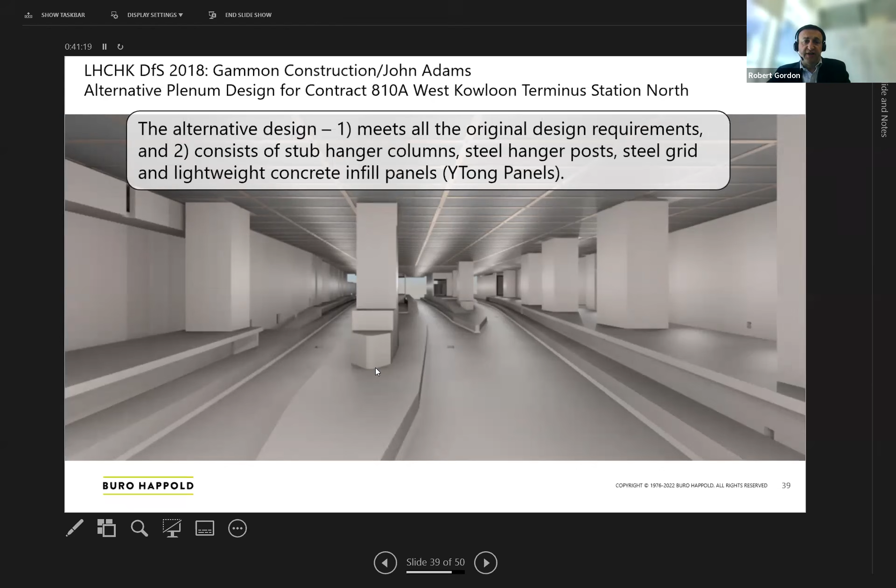Stub hanger columns, steel hanger posts, steel grid and lightweight concrete infill panels, in this case the YTong panels. Perfect safety record during construction. 98% of scaffolding was eliminated, 98% of in situ RC work was eliminated. A safe working environment, off-site prefab, and 3 months off the critical path. Saving time also means less exposure time to any risks on site, which is a good thing from a design for safety perspective if you can shorten the program.

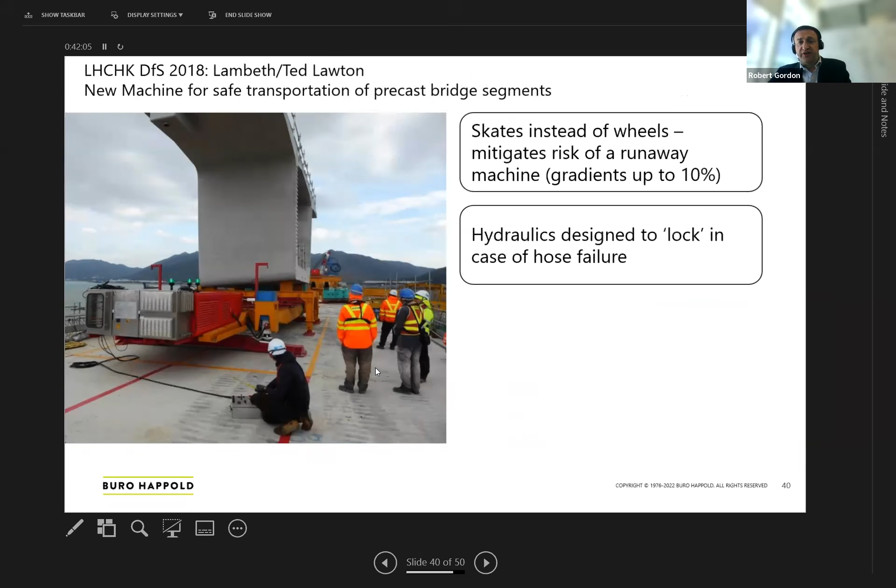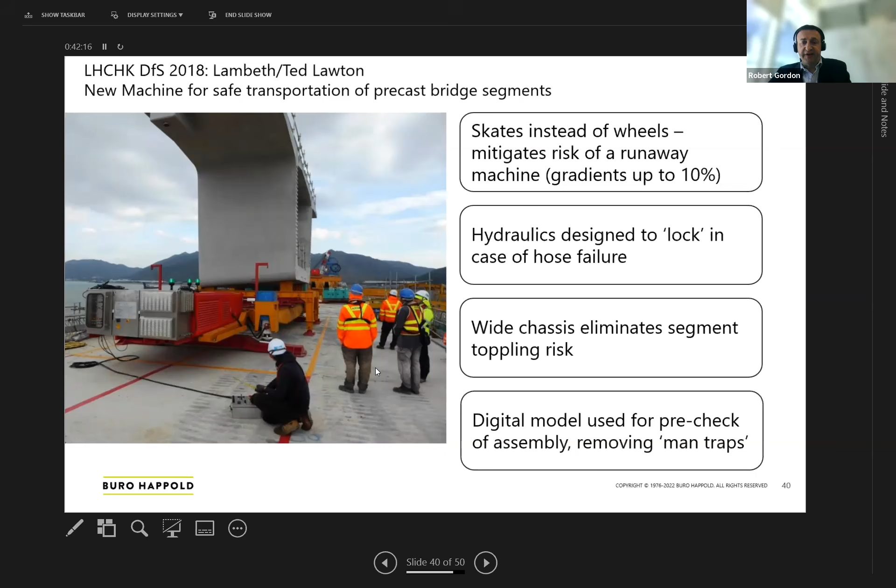This is another machine from Lambeth, where again, skids and skates are used instead of wheels, dealing with steep gradients. Hydraulics are designed to lock in case there was a hose failure so it doesn't run away. A very wide chassis eliminates any toppling risk. And again, digital models are used to remove man traps, finger traps, and make sure it's safe to move.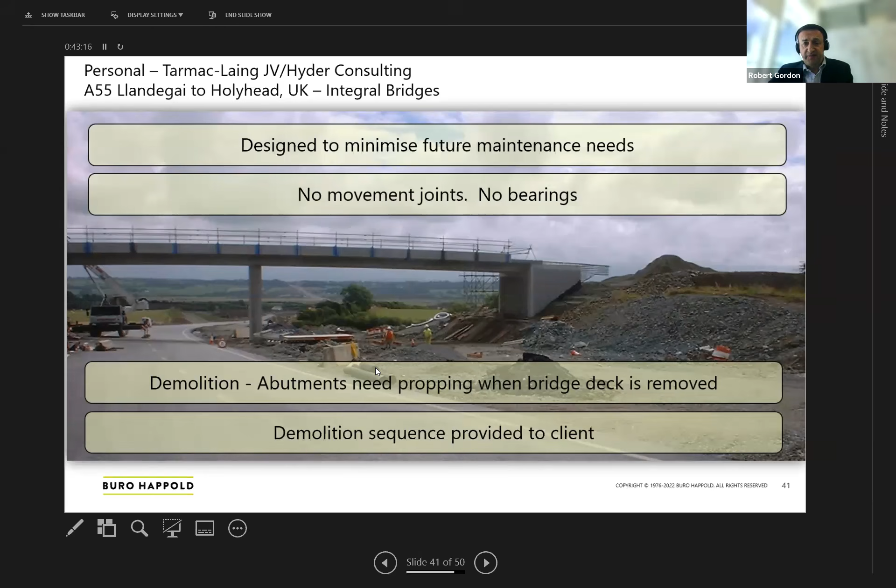That demolition sequence was provided to the client at the time. But I think if I was looking at this one again, I would probably design this as a freestanding abutment and remove the risk entirely. It also highlights the need for designers to consider the demolition sequence, particularly for an unusual design. You could argue in every case, a designer should consider the removal or demolition sequence.

This is A40 Western Avenue Bridges replacement in London, building over the Great Western Railway, which operates 24 hours a day, 365 days a year. It's the main road into London, carrying major services. The beams here were lifted in pairs with cross bracing between them for temporary stability. You can also see the steel deck put in place between the beams, providing a safe working environment above the railway, with all the shear studs in there.

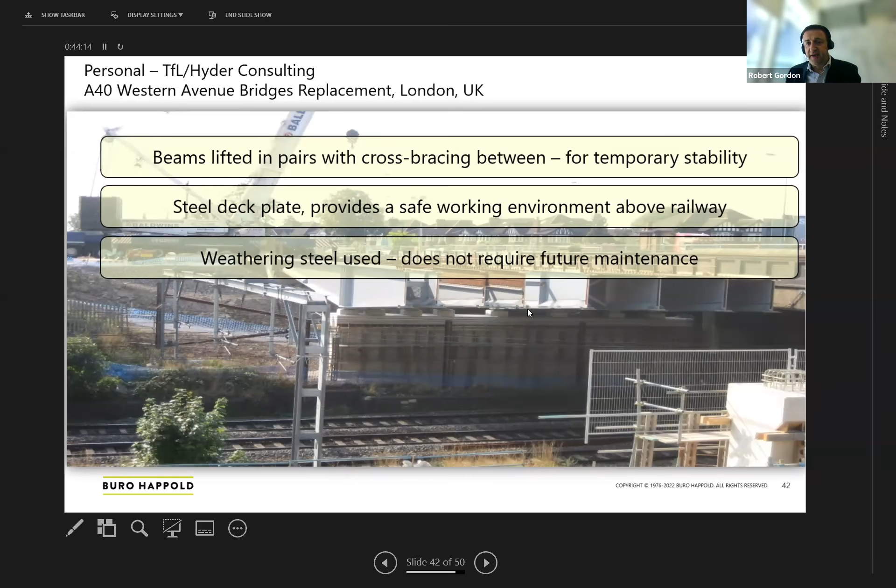Later, someone can come along and do the concrete pour to make the composite deck, but it creates that safe working space above the railway. Also, the choice of material: by design, it's weathering steel. When weathering steel corrodes, it forms a layer of rust which is impenetrable and never decays after that. So it's quite a good material to use over a railway. You don't need to repaint it, meaning less access to the bridge in future.

We also had to consider, during design, how to limit ground settlements, and therefore caissons were used instead of piles. We come to another example a bit further down the road, of a bridge that had to be installed. Now, it didn't start out this way—the original thought was to actually put a toucan crossing along this busy road.

But actually, the story on this one is that there was a Bailey Bridge crossing the road just out of picture here. It was dilapidated, had been struck by a vehicle, and was due to be removed. A toucan crossing at grade was going to be placed here.

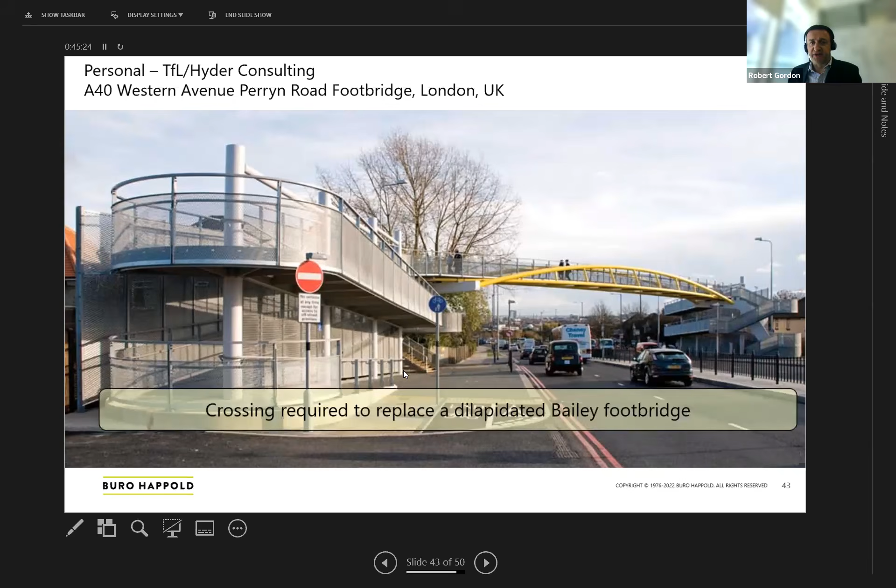But a blind man came along and said, well, if you put an at-grade crossing in here, I can hear when the traffic light goes beep, beep, beep, but I can't see that the cars have stopped. He had a good point. So in agreement with the client, we changed it to a bridge design, which is what you see here now. So a crossing to replace the dilapidated bridge, but it wasn't the original idea. It was basically a blind resident that forced all of us in the design team to rethink, and I think it was a great thing it happened.

And the main span was fabricated off-site. It came in on a low loader, 35 meters long, and it was lifted into place in one evening.

Also inclusive mobility is in here, so you can see the double height handrails. There's also privacy screens using extruded metal mesh, which gives you visibility when you look in one way, but privacy when you look the other. It's also vandal proof. And because you can see through it, elderly, vulnerable people can see who's on the bridge before they cross, so they can feel safe using it.

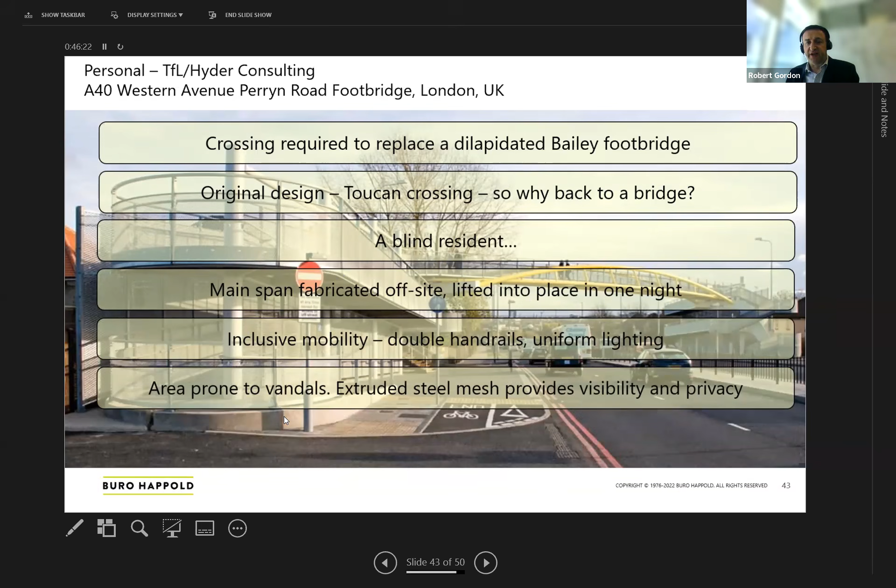Uniform lighting ensures you don't go from dark to light spots as you walk through, which is important for partially sighted people. And there's no hiding places, so people feel safe to use it.

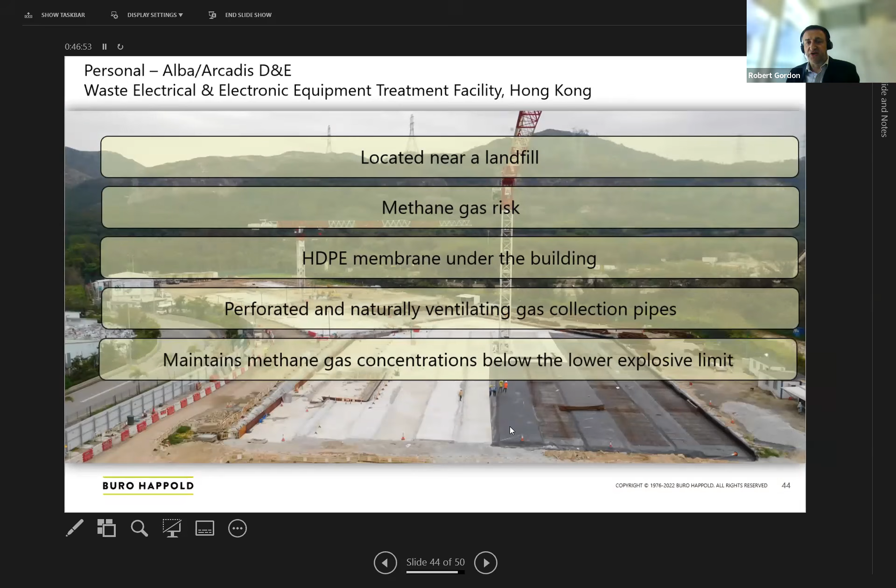Coming back to Hong Kong, the WEEE facility, built close to a landfill site, so there's a risk of methane gas. There's an HDPE membrane put here, but also perforated, naturally ventilating gas collection pipes around the building to vent it and keep the gas concentrations below the lower explosive limit, meaning the building is now safe.

At this point, I think I'd like to run through what are the key takeaways of what we've gone through here, and maybe share some thoughts on this.

So the first thing is perfection. Can we really be perfect in design for safety? I don't think we can honestly say that any of these examples are 100% perfect. And I'm sure as you've looked at these, you can probably find some faults in there and things you can improve on.

But that's good, because we should always look for improvement. And if we're all thinking in the right direction, we'll make our construction industry a lot safer. Hopefully you found that these examples provide some insights on a way of thinking that embodies design for safety. And I think whole life cycle safety has to be a fundamental.

ALARP stands for as low as reasonably practicable. That means the cost of mitigating the risks should be proportional to the benefit of mitigating the risk, because you can always go to extremes to eliminate a risk, but the cost and impact of doing so is disproportionate to the risk itself in the first place. Otherwise, we'd probably end up having none of the schemes actually built in the end.

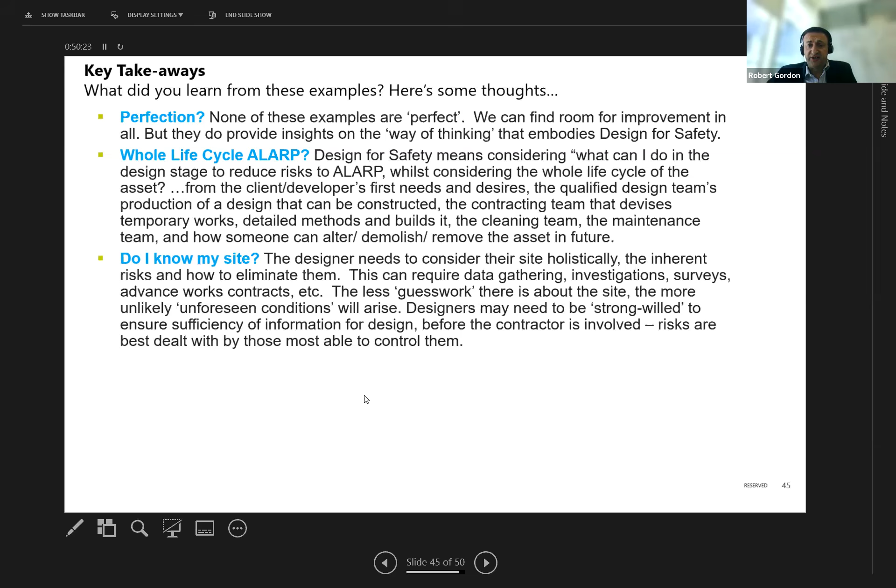Now, knowing if my asset can be built safely - good design has to consider the permanent and temporary situations. Sometimes that means you have to think about the erection sequence analysis and locked-in stresses, and also imagining where each worker will be when each part is installed, what plant will be used, and again, reducing risks on an ALARP basis.

Further consideration is, can I hide behind the codes? The design codes have evolved over the years, but it's very important to understand they don't cover every situation. I've had situations as a designer myself where I've had to design outside of the codes. If you actually open a code, within the first few pages, it will usually describe the conditions for using it. Designers do need to be responsible to recognize if they have an unusual design, and then consider what can go wrong, devise those solutions, highlight the issues, and get necessary approvals and verification, or even if it's not a statutory approval required, get it verified by a competent person before it's implemented.

And that really falls into the next point, which is, am I an expert designer? To be a competent designer, you need to know what your limits of competence are, and know when you need to go and ask somebody else for help.

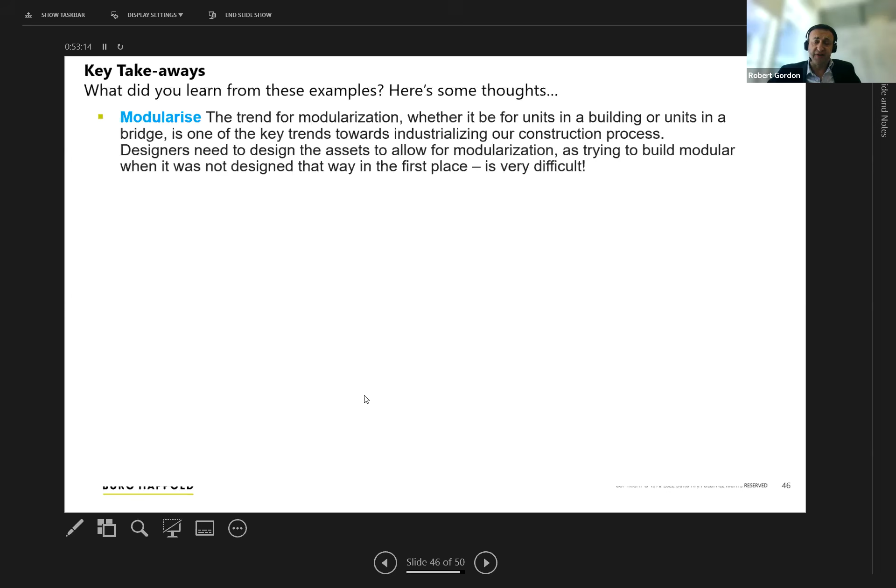So I think designers can design assets to allow for modularization. And if we don't design for modularization, and then hand it to a contractor who wants to do it that way, it's very, very difficult to reverse a design you've been given to build.

Repetition - design in repetition. We've seen that where you can repeat an element, the learning curve for the next worker who has to deal with it is much lower. The more you can repeat an action on site, the less likely there'll be mistakes, less likely laborers will make mistakes, and that should mean a safer environment.

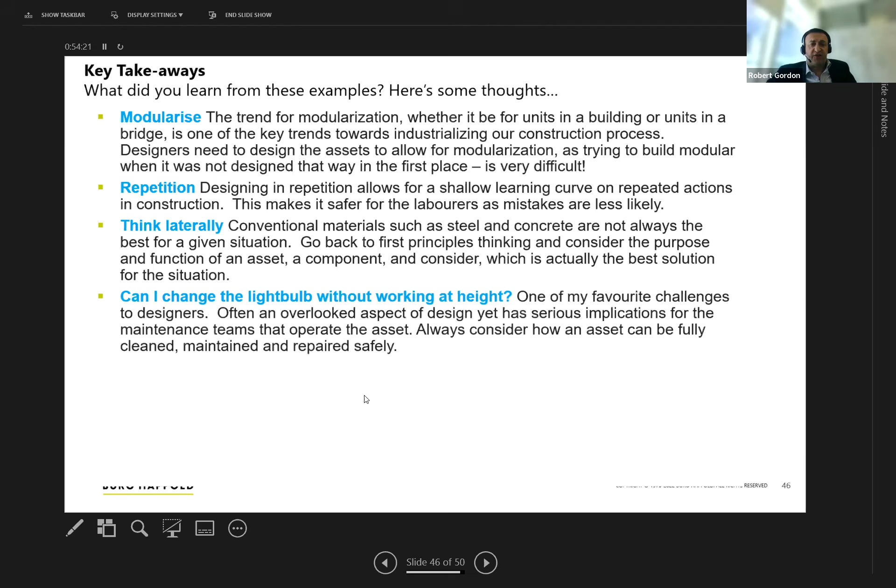And the favorite question I think we should always ask ourselves: can I change the light bulb without working at height? And also to minimize exposure.

Realistically, again, on the basis of ALARP, have we done what we can to minimize the exposure? Have we minimized the number of people exposed, the time they're exposed? And if we limit their risk, we can also improve the safety.

And digital technology - you can create a digital twin of what you're about to build before you build it. Technology these days is so advanced now that you can look at, is it safe to build, maintain, clean, repair, demolish, remove? And it can all be rehearsed digitally. You can look for all the risks in doing it, and then you can finalize a design.

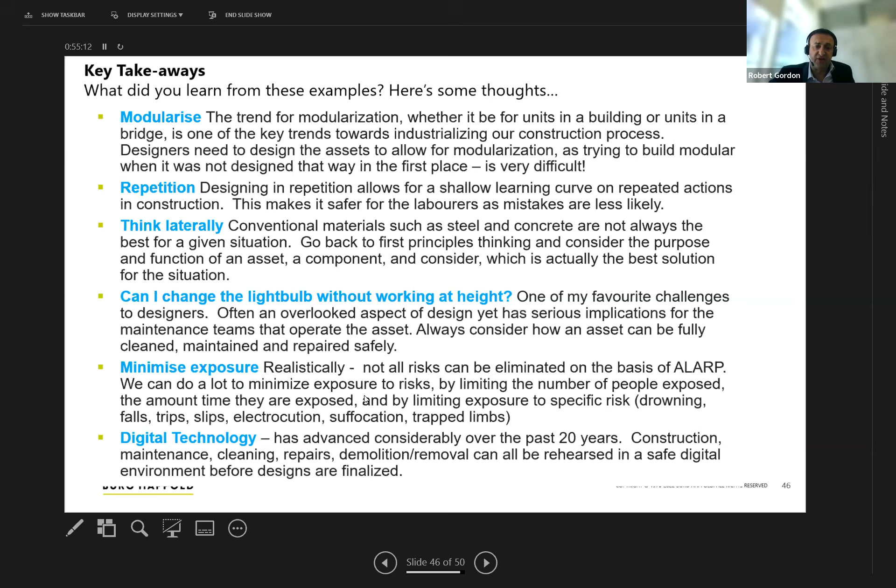We also need to be cognizant that designs evolve - from the initial consultant's design to the actual construction, the design changes. So it's important to ensure that when those design changes are implemented, everybody involved understands the original design and the original design intentions.

We do see examples of contractors redesigning elements for safety, speed of construction, economics, or a mix of those. So you have to ask: could the designer have done more in the first place? I think it's unfortunate if designers leave it to the contractor to redesign permanent works when there are safety inadequacies inherent in the original design in terms of buildability. That means designers thinking far beyond a wished-in-place asset.

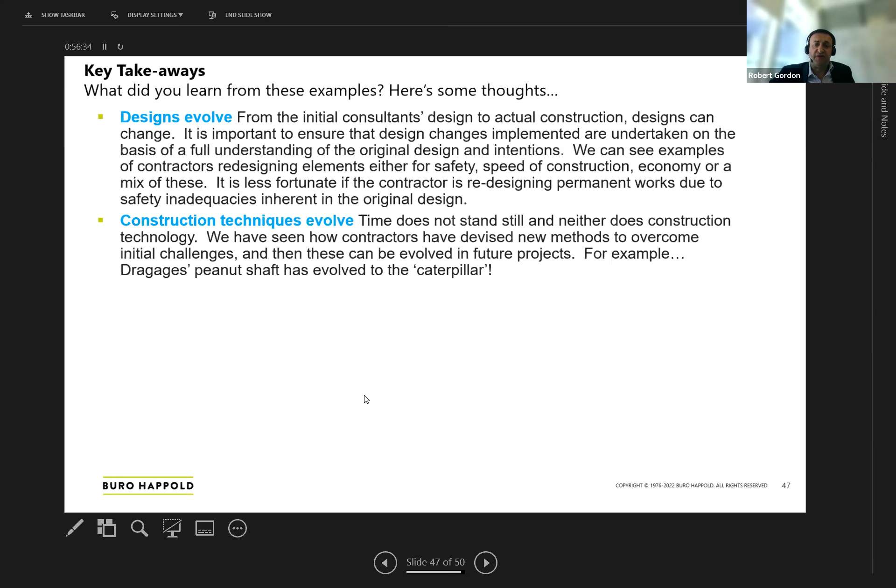Construction techniques also evolve. Time doesn't stand still, and neither does construction technology. You'll have seen in some of the examples I've shared some new technology, new methods to overcome the challenges we traditionally face, and how those can be evolved in future projects. The peanut shaft from Dragages is a very good example of that.

So in terms of what more we could all be doing as an industry, I'd say let's keep sharing these good examples. The more we share, the more people know, the more ideas they have to implement design for safety at different stages of the project life cycle.

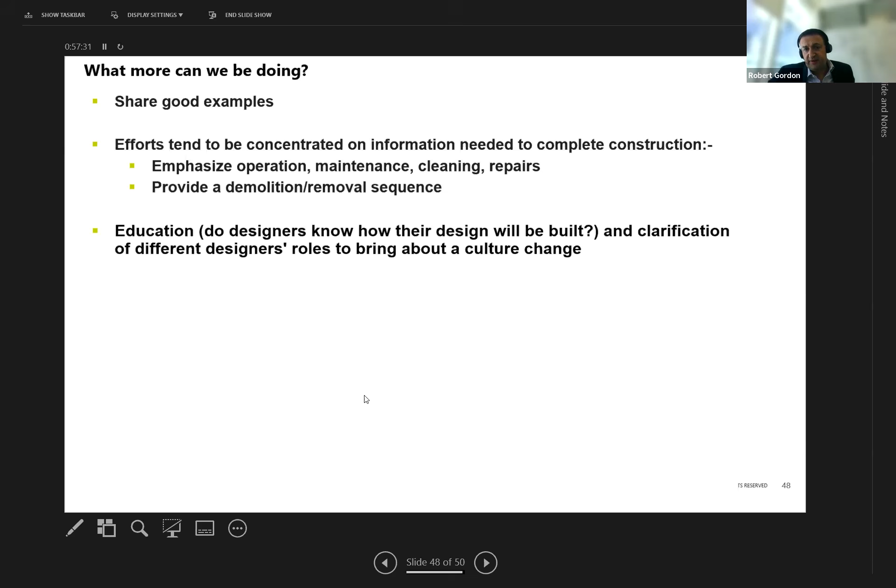We need to get away from the fact that most of the effort appears concentrated at the construction stage. We need to think at earlier stages - emphasizing operation, maintenance, cleaning, repairs, demolition and removal sequences, and education. Do designers know how the designs will be built? Some yes, some no. If we get clarification on different designers' roles, we may start to implement a culture change.

In Hong Kong, for public works, there's fairly wide adoption of the Development Bureau's Design for Safety guidelines, but it's less prevalent in the private sector because it's not required by ordinance.

Certainly, cross-industry collaboration on design for safety will help a lot. Whether it's with IOSH, HKOSHA, the Temporary Works Forum, the engineering institutions, the architectural institutions, construction clubs like the Lighthouse Club, the Construction Industry Council, the contractors associations, the consultants associations - we can do a lot more to collaborate across our industry.

Also, a little plug here, but taken seriously - the Lighthouse Club, outside of COVID times, has also been organizing an international design for safety competition. This is another way of promulgating great examples of design for safety and recognizing the individuals who are practicing it.

I think as an industry, particularly in Hong Kong, we can also lobby our different industry bodies to in turn lobby the Hong Kong government for a Hong Kong version of the CDM or design for safety regulations. These things need to be tailored specifically to Hong Kong, because Hong Kong has its quirks. You can't just copy and paste from another country, but perhaps a lot of the principles can be transferred over.

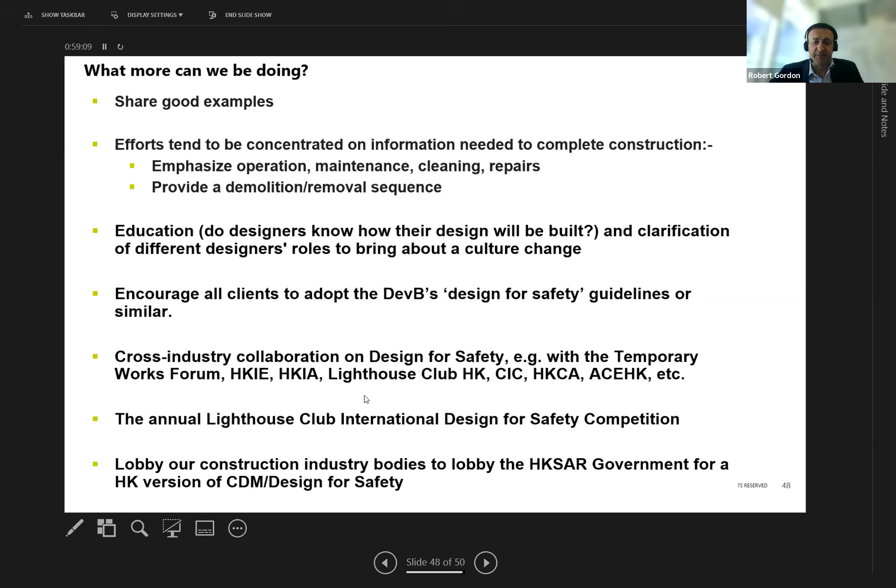But also think from today - what were your favourite examples? What sticks in your mind? And what are you going to be thinking about when you go back to site, when you go back to work? What are your thoughts about it?